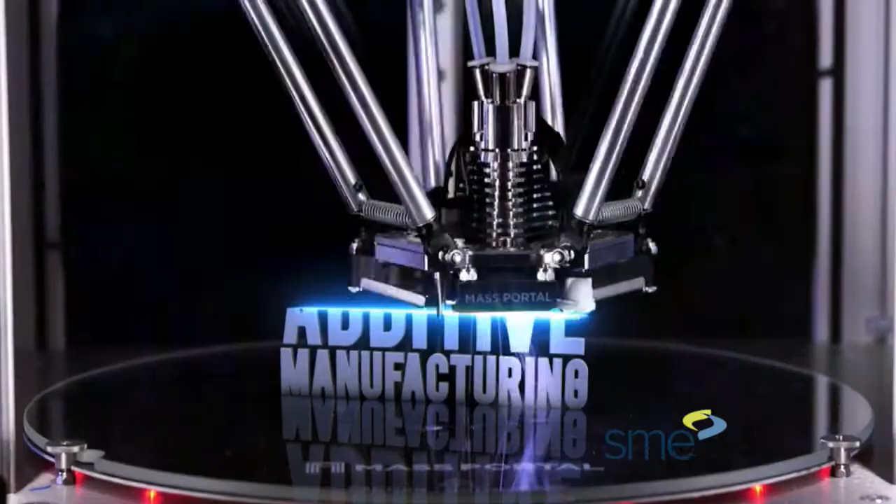Additive manufacturing, the idea that changed an industry, building things layer by layer, bringing innovations to the world never dreamed possible. Building designs, building parts, building an industry. We give you strength in numbers.

Together with partners, members, industry, academia, and more, SME is building a home and a community of over 200,000 professionals. People like you who are advancing 3D technologies and creating incredible innovations. You have questions, we have answers.

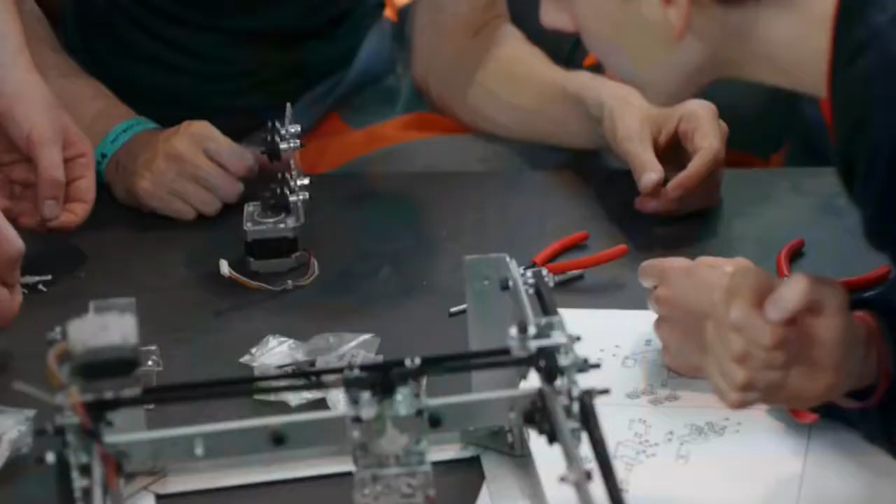No matter where you are on your journey in additive manufacturing, exploring possibilities, designing new innovations, or facing the challenges of scaling up production, SME is your resource every step of the way. SME is fully committed to the advancement and increased adoption of additive manufacturing technology.

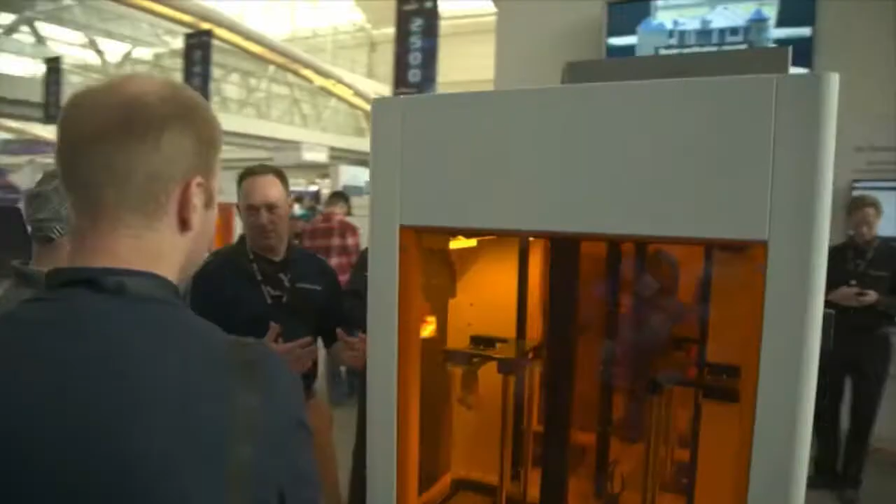That's why we bring the industry together, making connections face-to-face at North America's leading additive manufacturing event series, RAPID plus TCT. Together, we build relationships. SME's Additive Manufacturing Community provides you with unlimited access to industry experts, connecting you to world-class knowledge that's advancing the manufacturing industry.

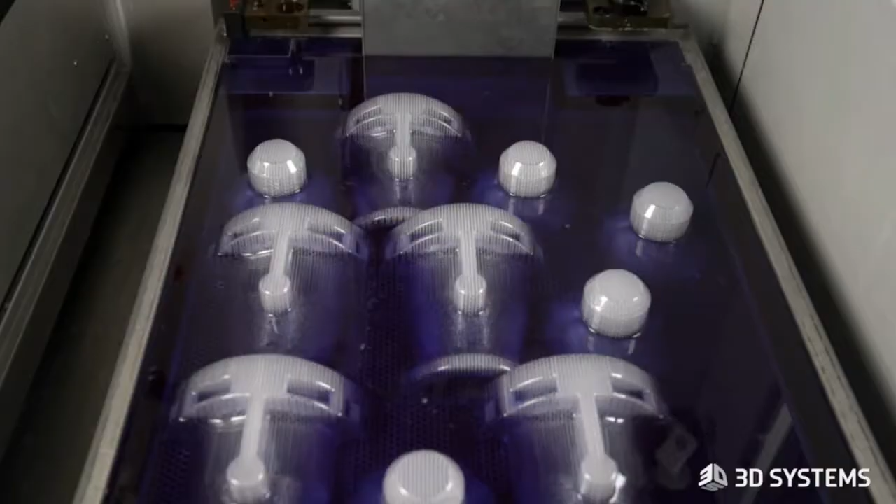Technical groups working together to create content and programs, accelerate industry standards, and solve challenges. We build knowledge. SME is your 3D technology resource. Technical papers, conference presentations, industry news, videos, and webinars keep you on the leading edge of development and prepare you for what's next in the amazing world of additive manufacturing.

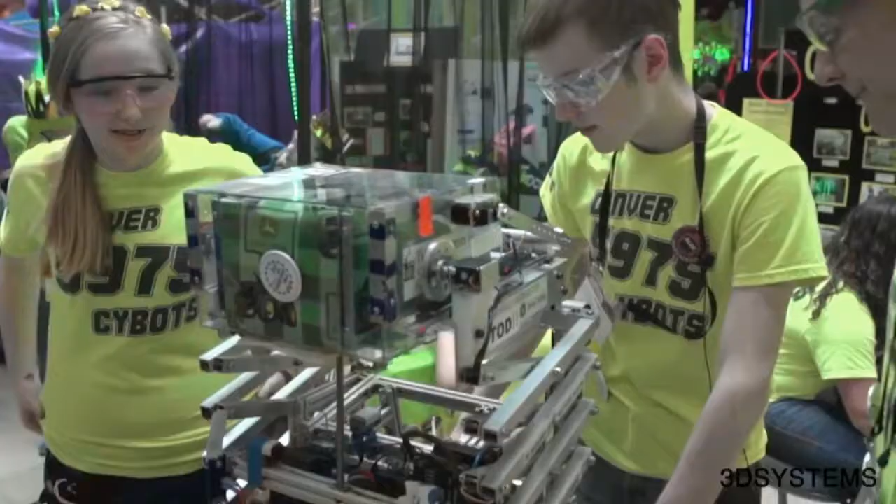Together, we build the future. Attracting students to exciting careers in manufacturing through contests, competitions, and dynamic hands-on experiences. We build reputations with certifications, establishing the gold standard for knowledge and preparing you for unlimited success. SME leads by partnering with the R&D community, universities, national labs, and America Makes to drive technology development.

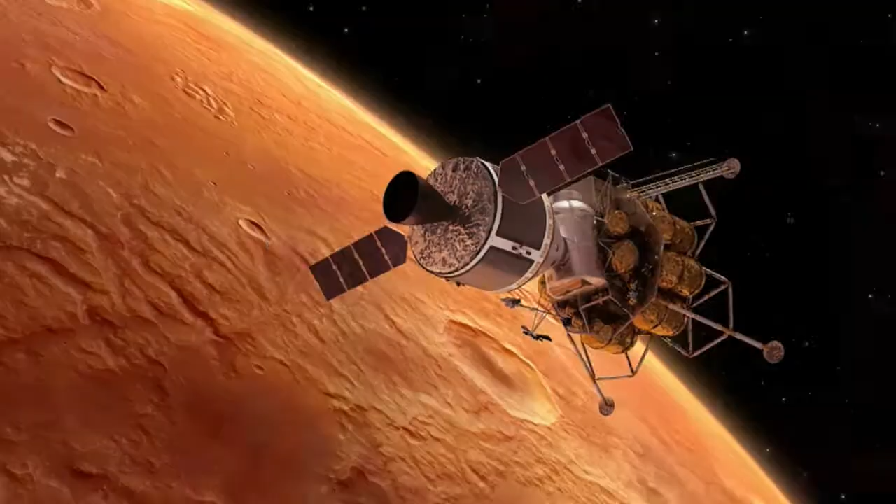Together, we're building a skilled manufacturing workforce, connecting skills with jobs, while integrating new technologies and creating products that couldn't be created before. We've come a long way, and so much more is possible. Together, we'll forge new frontiers for the unlimited, powerful future of additive manufacturing for generations to come. SME is building the ultimate powerhouse community in additive manufacturing. We're better together. Welcome to SME. Welcome home.

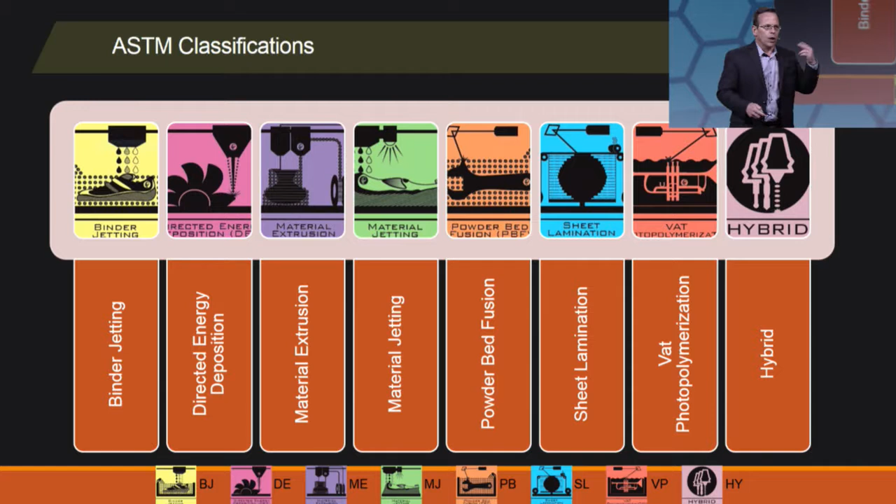So be careful what you ask for. I hope you're ready for what's new, because you're going to have to hang on to your hats, because this is going to be a very fast-paced ride through what's new. We're going to hit 100 miles an hour right now.

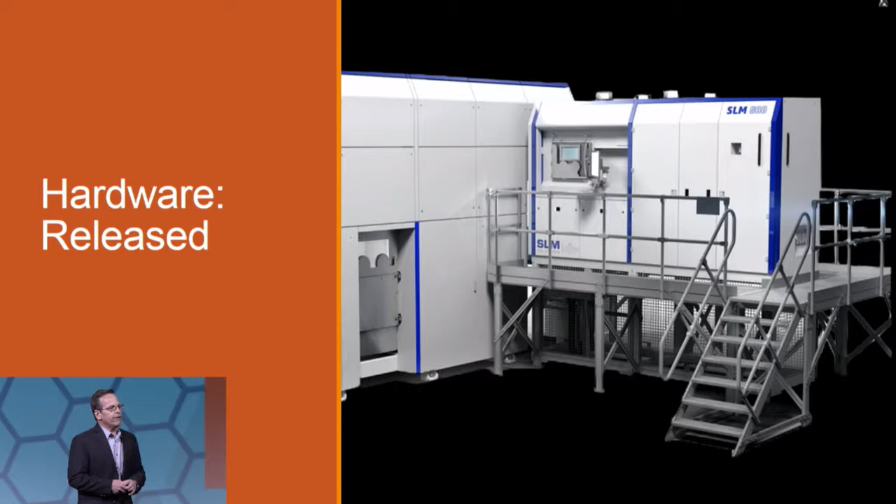We're going to start with hardware in the 3D printing or additive manufacturing space that has been released, meaning you can buy it today or very shortly, a matter of weeks or a month or so, and have it available in your shop. We're going to start with metals.

XJet out of Israel installed their first two machines. The platforms are called Carmel 700 and Carmel 1400. The process is called nanoparticle jetting - they're jetting nanoparticles of metal or nanoparticles of ceramic. That creates a green part, which then goes into a furnace for full sintering. The Carmel 1400 has a 1400 square centimeter working area.

The 700 is a little smaller, with 700 square centimeters. Now, one thing to note here, XJet has announced this technology, talked about it here at RAPID over the last 3 years. So sometimes you have to exercise patience for new technologies that are coming out, or maybe not. Meld Manufacturing surprised me, popped out of nowhere.

They have a machine to show you that they can sell to you today, called the B8, with a brand new process for additive manufacturing of metal parts based on friction stir welding. What they're looking to do is overcome some of the challenges and limitations we have with respect to residual stress. This process doesn't have that, and it expands the portfolio of materials you can use.

So using friction stir welding also allows them to use a variety of inputs. They can take powder, they can take recycled chips from your CNC operations, they can take bar stock or tube stock, put it in the machine to create a metal part. They call it solid state because it never hits a melt point, and that's what reduces the residual stress. So we expand our material portfolio and also pick up some speed. They claim about 10 times faster than competitive technologies.

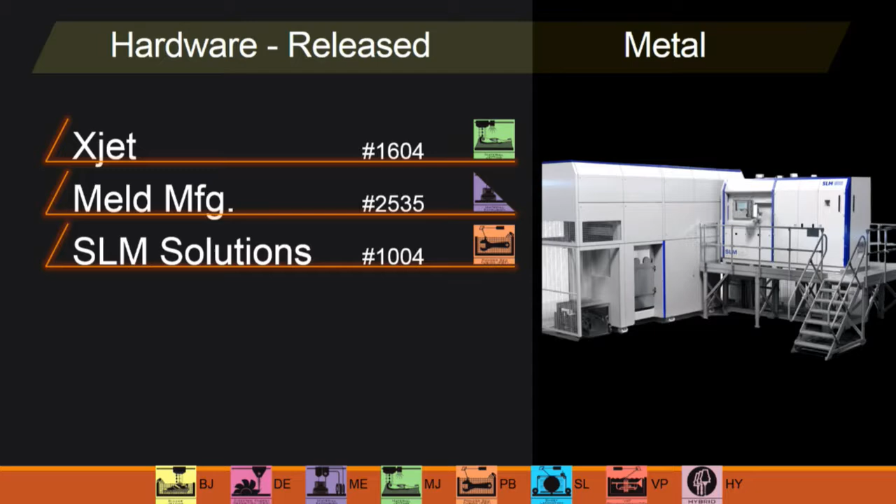SLM Solutions, a tried and true player in the metal space, announced the SLM 800 at Formnext in November. This is a large format metal additive manufacturing machine based on the powder bed fusion process. It's tricked out with 4 lasers, 700 watts each, and built for scalability and integration into an automated workflow. The machine itself is only the right half of the image behind me. All the pre-processing and post-processing equipment and processes are housed in the equipment to the left-hand side, to handle unpacking, depowdering, powder handling—all the things that have lots of touch points and labor demands that drive us crazy and prevent us from moving truly into production.

Renishaw, also another tried and true player, is going a little different direction, staying with the size of machine they're known for—a medium-sized frame, roughly in the 10-inch by 10-inch range—with the RenAM 500Q. Q stands for quad. The RenAM 500 has already existed; they've added 4 lasers, 500 watts, to make the Q. This is all about lowering part cost through efficiency in the operation. It also has the ability to bolt on pre-processing and post-processing automation units to reduce touch labor.

Spee3D, a new player, is going after speed. How does 100 times faster or 1,000 times faster sound to you? How are they doing that? They're borrowing from the cold spray industry, a well-established technology where you're firing metal powder at supersonic speeds. When it makes impact, you form a mechanical bond. So they too are eliminating the issue of residual stresses, which drive us crazy in many of our technologies.

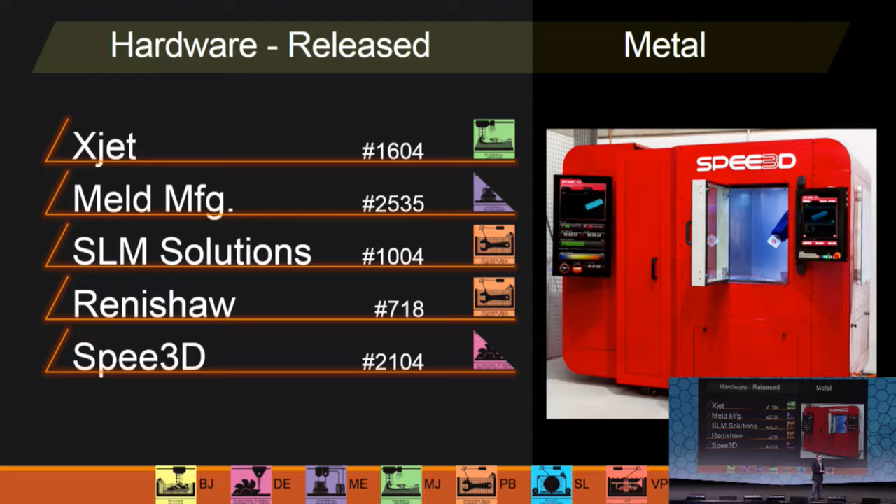They're also expanding the material platform or portfolio, like Meld Manufacturing has done, to the extent that they'll be demonstrating in their booth at 11 o'clock and 3 o'clock tomorrow this machine called Lightspeed, or Lightspeed 3D—I'm not sure which name they go with—producing copper parts. And by the way, the National Research Council of Canada is also using this technology, playing with magnetic materials to try to 3D print magnets.

Sticking with metals, Formalloy. Previously they had the L series; now they've got the X series, which is just being introduced and debuting here at RAPID. This is directed energy deposition technology. The difference on the X series is that they're adding blue laser technology. IR, infrared, is very standard in our industry—they're adding blue laser.

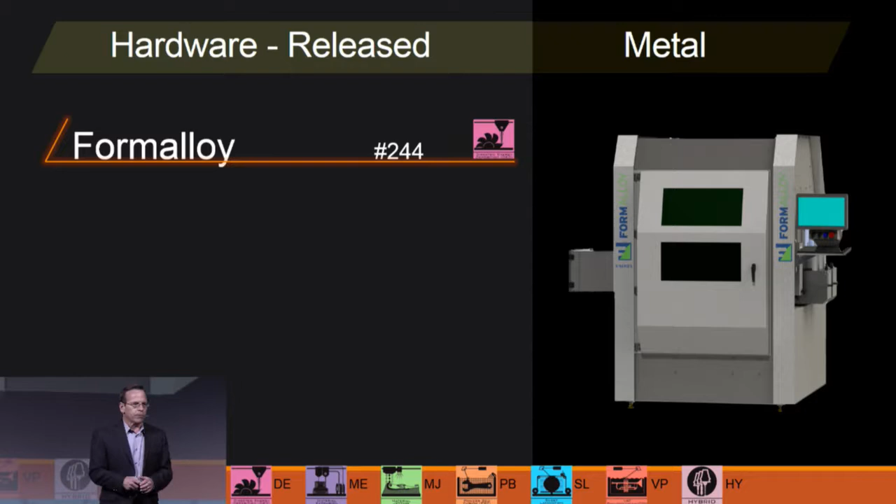Why? Blue is absorbed faster, or more readily, so that increases the throughput. They're saying 2 to 10 times faster. It also expands the material portfolio available to you, so you're getting speed and expanded material offerings.

Digital Metal—this is a business unit or subsidiary of Hoganas, which is a global supplier of metal powder for traditional applications like press and sinter, and metal injection molding. For about 6, 7, or 8 years it's been offering additive technology as a service. Just late last year they introduced the DM2500 as a piece of equipment you can purchase to build your own metal additive manufacturing parts. It's based on binder jetting technology.

So they're going to jet a binding agent onto the metal powder. That creates a green part, which is then taken through a debind process and then into a furnace for full sintering, yielding a fully dense part—the same exact methodology and process used in the press and sinter and metal injection molding marketplace.

They are going after smaller parts, higher precision, finer surface finish. Think in terms of jewelry and watch cases, that sort of thing.

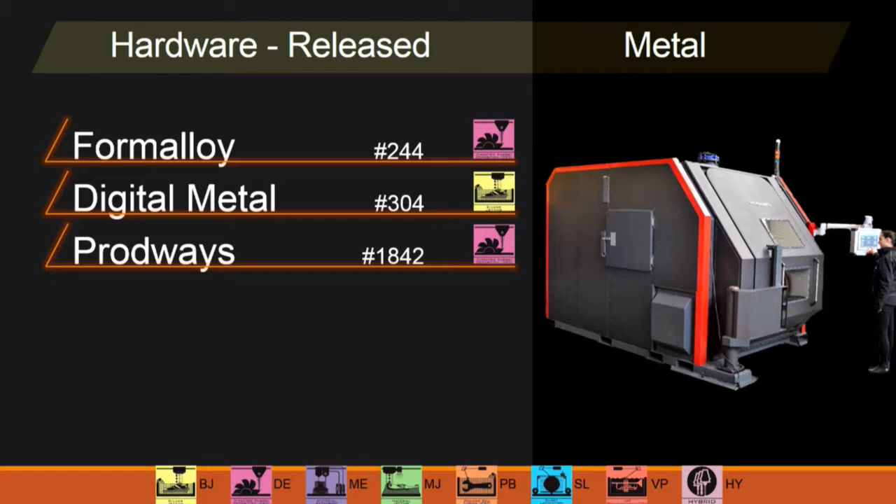Prodways. I don't know if I like this name. They're calling it Rapid Additive Forging, and I don't see any forging in this. It's actually based on electric arc. So a deposition head mounted to a robot in an inert environment, laying down metal material in the inert environment allows them to go after the reactive materials, such as titanium, which happens to be their first partner, their first installations.

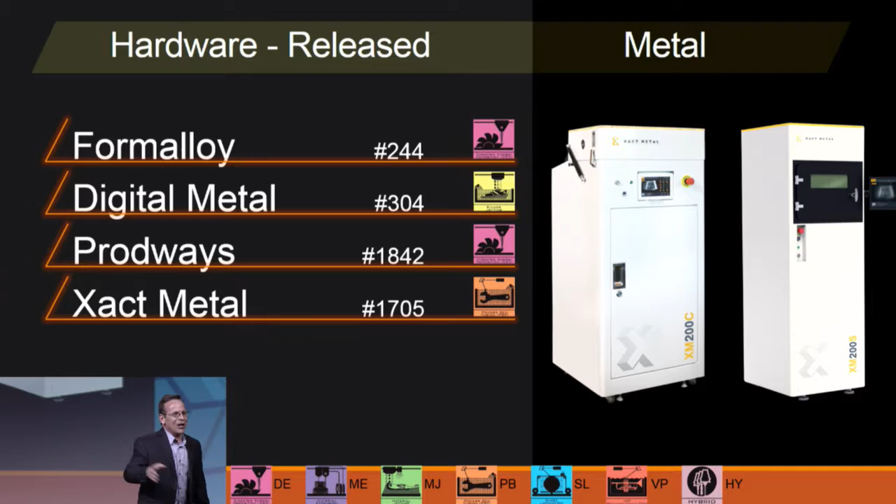In the non-metals, we have EOS, who introduced 2 machines. The P810, now this is a high temperature platform. They've had the P800 out for quite some time. The P810 is the successor to the P800. It is a larger format, plastic powder bed fusion system.

And interestingly, in the press release, which was embargoed until this morning, so this is news that's just breaking, it was designed around the specific intent to process a material that they call ALM HT23, which is a carbon-loaded PEKK material. It also has all the automation components around it to fit into a production environment.

They also announced recently the EOS P500, which is the successor to the P396, which is reducing part costs by about 20 to 30% while increasing throughput by 2 times.

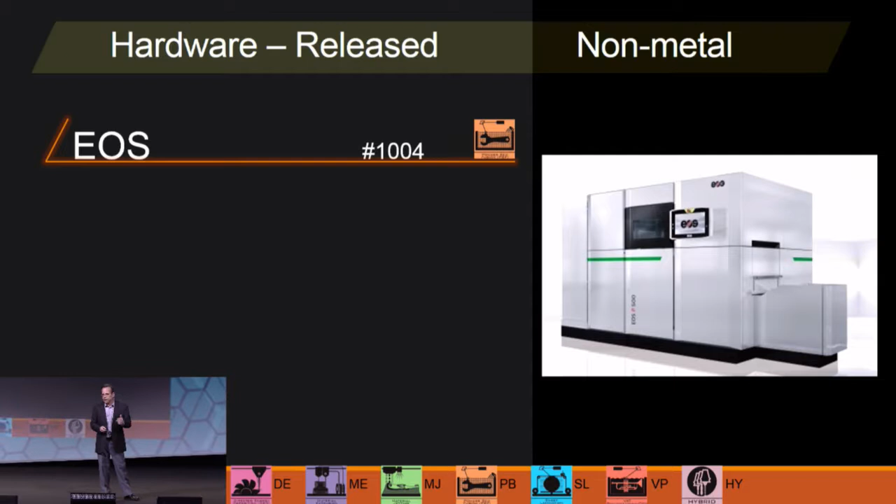HP has 2 announcements. Most recently, the Jet Fusion 300, 500 series. There are 4 machines in this series, 2 for the 300, 2 for the 500. They vary by the number of agents that you can print and also by the size of the envelope. It's a mid-range system for size.

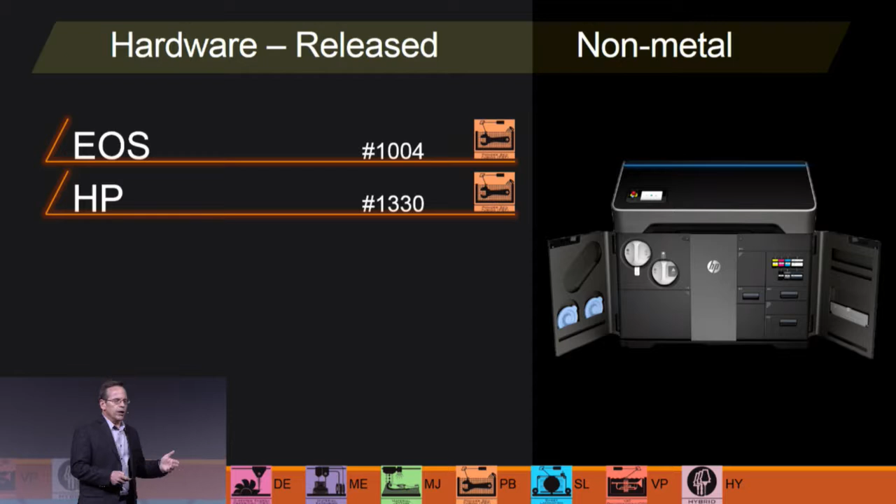Why would we need 8 agents? Well, this is HP's delivery on the promise that we're going to have multi-jet fusion with full color parts. So a detailing agent, a fusing agent, and 6 agents to impart color. The price point for these is very attractive, starts at $50,000 to get you into the jet fusion or multi-jet fusion processes.

Then we have Farsoon, going after large plastic powder bed fusion systems, the FS1000P. FS for Farsoon, P for plastic. 1000 stands for the length in the x-axis of the build chamber, so 1,000 millimeters. It is also a reasonably high-temp machine at 220 degrees C, and it's the first time they've introduced or tied into their machine their concept that they call CAMS, Continuous Additive Manufacturing Solution, which again is a modular, scalable solution to bolt on the processes on the back end and front end.

In their statement, it's all about driving the uptime, or the production time, of the machine, so you never have to sit and wait for something else to happen before you build your next part.

Here's something new, born out of the Technical University of Vienna. They're calling the process hot lithography. The premise is that the photopolymers we have available today are limited in mechanical or thermal properties because we have to use less viscous materials to get them to flow to where we want them to go. So what happens to a material when you add a little bit of heat? It becomes less viscous. So they're doing a hot lithography process so you can use more viscous resins in the 3D printing process, and what they believe that'll do is open the door to material properties not previously available to us in vat photopolymerization.

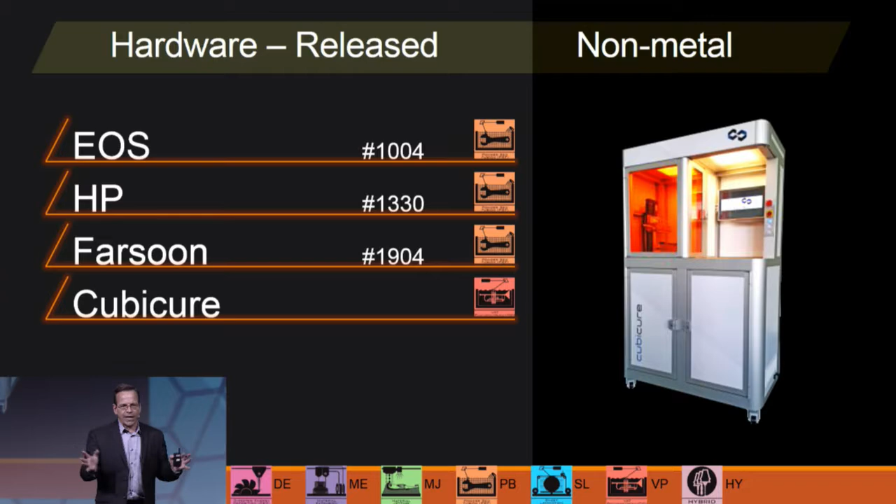They also state that the hot lithography process makes the material more stable and also more reactive. Being more reactive means you're going to have faster curing, faster build times. Take a look inside the machine — it's cartridge-based, and they're developing their own materials. Plug the cartridge in, heat it up, and build your part.

The last one on this slide is UnionTech. This is a Chinese company that came to the North American market in the last 2 years and has really built a reputation for quality equipment, dependable equipment, and really nice output on their parts at a lower price point. With their latest machine, the RS Pro 1400, they're also going after very, very large stereolithography — 1400 for 1400 millimeters. They had to actually build a carbon fiber recoater blade to extend over the 1400 millimeters because they found that metal was deforming in the middle due to the expanse.

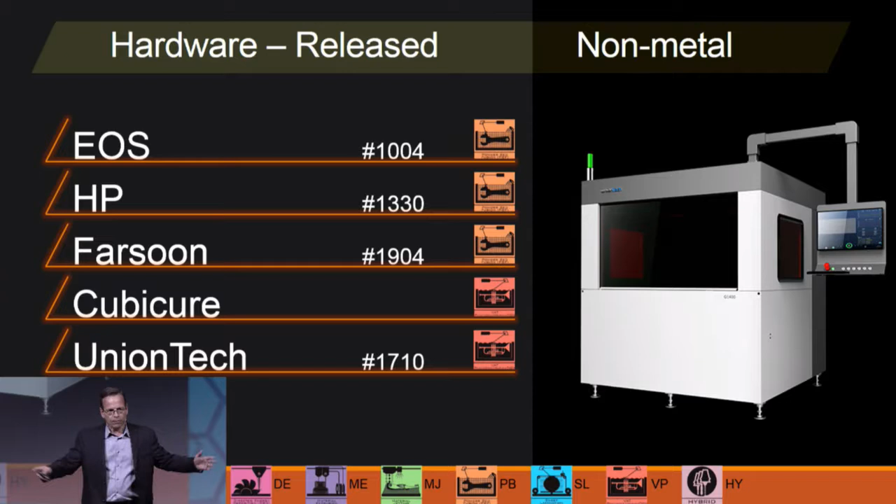The next ones on this slide are the material extrusion class. This one was embargoed until today. Ultimaker, who's been in the space for a number of years, is coming out with the S5. The S5 runs about a 14 by 11 inch build area, so it's pretty good size. But what caught my attention is that it's built for the industrial user, and they make the statement that it integrates hardware, software, and material properties.

What the heck does that mean? Well, it means it's not up to you as a user to work with the hardware, figure out the material properties that will actually work to build your part, and tie that all together with third-party software. They're building an entire package, a solution that aids in predictability and routine performance, where you don't have the doubt that something will or won't build. They're also adding lots of industrial-grade hardware inside the equipment for reliability and uptime.

Another company tackling the industrial market for material extrusion is Fusion3. They're here in booth number 1704. Their machine is called the F410 — really reasonable price point, $4,500 — running in the 14 by 14 inch build area. It does have an enclosed chamber. It's not going to maintain high temperatures, but it will maintain temperatures up to 45 degrees C, which helps with managing stresses that can cause deformation in your material extrusion parts.

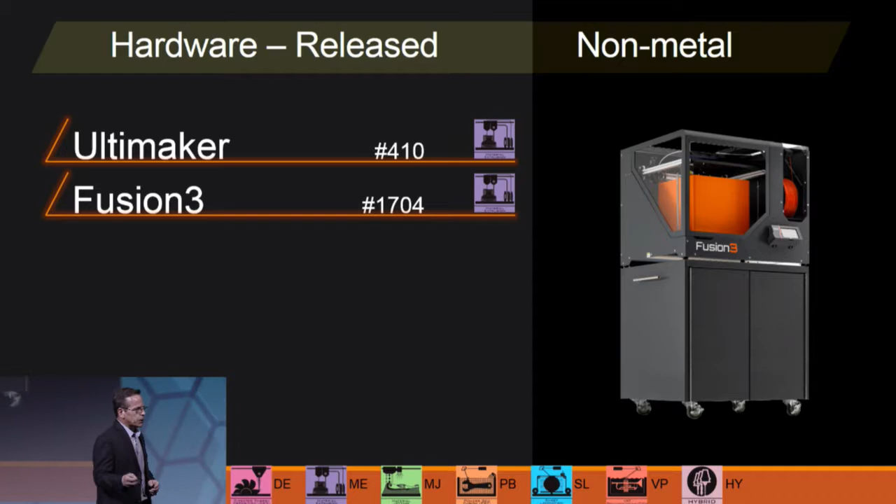Titan Robotics — I believe this is what Titan Robotics printed. They've announced that they're turning to industrial motion controls from a world-renowned leader to give you faster operation with precise control of the deposition head, so you get speed and accuracy. You also get a feedback loop for predicting and preventing material jams. Their line of equipment is called Atlas, and these are not small desktop machines. Atlas runs upwards of 4 foot by 4 foot by 4 foot build area, and you have the option of an open chamber exposed to ambient temperature or an enclosed, thermally controlled chamber.

Essentium, actually Essentium Materials, has come out with a machine called the HSE, high speed extrusion. They're picking up most of their speed not by a bigger orifice and dumping more material through, but by faster tracking of the deposition head across the XY area. This one's interesting because they have patented technology that was previously a bolt-on for other people's equipment. It's called Flash Fuse. They're using a material coated with nanoparticles, and as you can see in the little purple area, they use plasma to send an electrical charge which activates that coating, creating localized heating and increasing the Z-bond strength. They're also claiming about 10 times performance increase compared to other material extrusion systems.

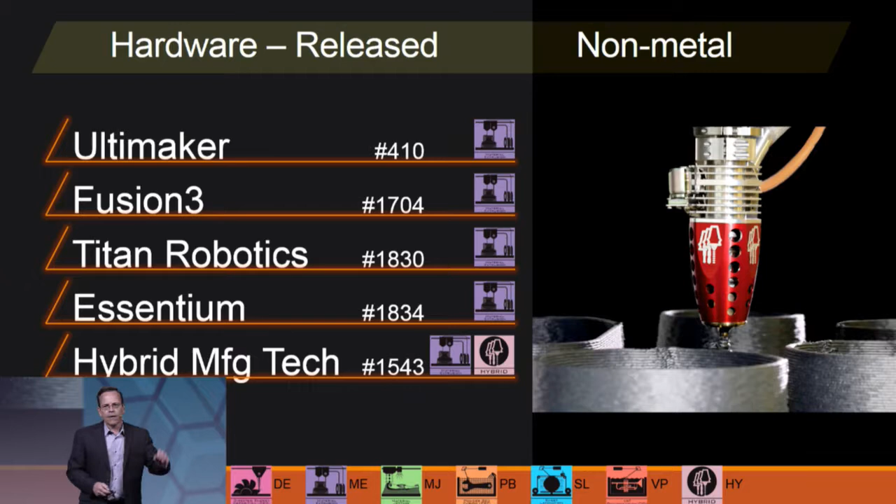Previously, it's focused on the directed energy deposition technologies or laser metal deposition. Now it's into polymer extrusion. This is pellet fed and pumping out upwards of 20 pounds of material an hour. So we're going to kick over into what's been announced but not available. So we're getting a little peek into the future.

3D Currax, they're not here at the show. However, they were kind enough to allow RAPID to be the first event here in this presentation to publicly expose what's going on. They've actually launched their website timed with this presentation, so you can go to 3dcurrax.com and see what they're all about. These guys are attacking production. They want to disrupt the injection molding marketplace. They're using LCD panels, backlit, so imagine DLP, but using LCD. The reason for that, LCD panels come in larger formats, gives you scalability.

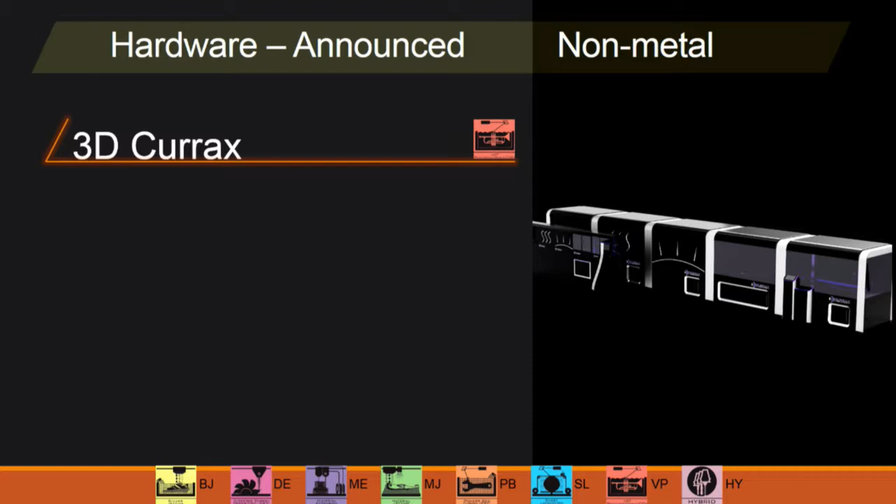Two machines available, the MRK3 and the MRK10. The 3 has an XY working area of a little over 400 square inches. I'm guessing that's going to translate to about 25 inches by 15 inches for XY. The Mark 10 is 10 times bigger, so 4,000 square inches of working space, which is going to get you into probably roughly the 70 to 80 inch range for at least one of the axes.

Now, to attack the injection molding market head on, they're looking at speed. If you go with the Mark 10, build an impeller about 2.5 inches in diameter, 1 inch high, that's a 30-minute build. But you can fit 722 of those impellers in the Mark 10, which breaks down to a throughput time on this machine of 2.5 seconds each, which is very, very competitive, actually best the injection molding marketplace.

However, they're not sticking with just a machine. As you can see here, they're thinking in broad terms and automating the entire process, adding robotics, adding artificial intelligence to optimize the build to get the most out of it, taking you all the way through to cleaning and curing and post-support removal in an automated fashion.

Next up, Evolve Additive Solutions. This is a spin-off or spin-out of Stratasys. The news came out, I believe, about a month or two ago. The process is called STEP, and I'm going to walk you through that terminology so you understand what's going on. STEP stands for selective. We can scratch that. That's an unneeded word. The next word is thermoplastic. So this is not the metal solution that Stratasys has hinted at. Instead, it's thermoplastics. It's able to process both amorphous and semi-crystalline materials.

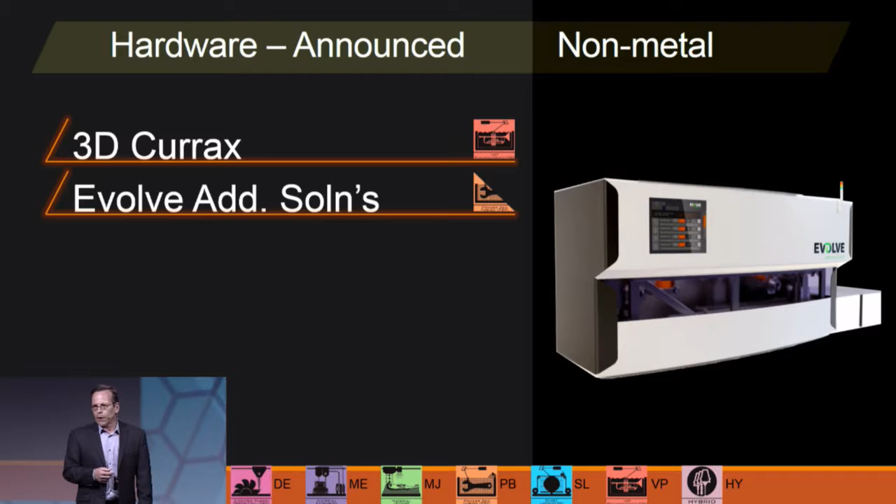Now they are claiming, and I believe this to be true, I saw this back in May of last year, early prototype machine, they're claiming speeds 50 times faster than the fastest powder bed fusion technologies on the market today. They're claiming near isotropic properties, they're claiming surface finish that rivals injection molding, and they too, like 3D Currax, are going right at the heart of the production technologies that we know today.

Another new one, MVP, Magnum Venus Products in collaboration with Oak Ridge National Labs. Large format, 16 foot by 8 foot gantry-based system to produce additive manufacturing parts in thermoset materials. That's the first time you've heard that combination of large and thermoset. The company is a supplier of equipment for the composite part-making industry, so their target right now is to use the benefits of thermoset, meaning that they're not going to melt in an oven or an autoclave, to make the molds to make the composite parts. Aerosint.

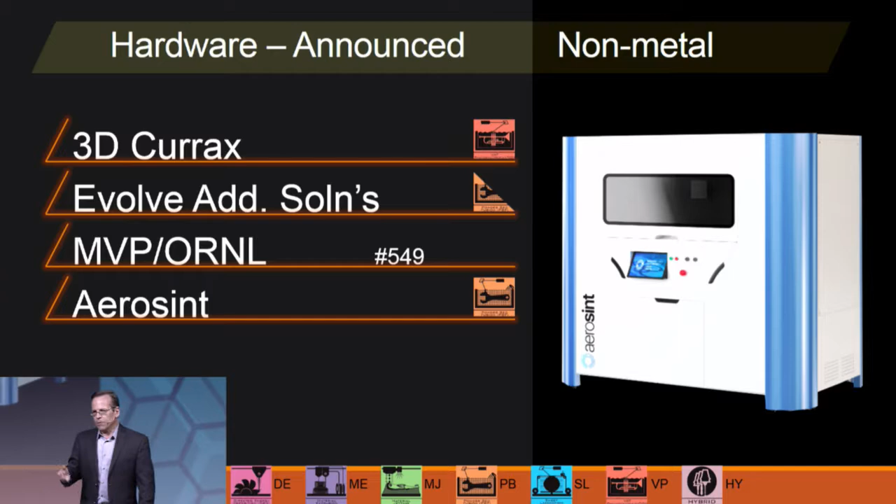But short-term, they're going to go after plastics, and they're going to take on one of the issues that we have in powder bed fusion, which is recycling rates. All that excess material in the machine that is just supporting or holding in place the part is exposed to temperature, which causes thermal degradation, which means that you can't use it over and over again. Well, the second material they're going to deposit is a non-fusing material, which means that you can recycle it unlimited, so you're not losing money by material that you can never touch.

Next one up, this one is announced. It's really available right now, but since the company doesn't sell direct to you, the end user, but sells to OEMs of equipment, that's why I'm saying it's announced. So Strangpresse is exclusively licensed Oak Ridge National Labs technology for multi-diameter orifice extrusion heads. What that means is on the fly, you can go from small diameter for high precision, fine detail, and then open it up on the same build on the fly with a larger diameter to backfill to give you quality, precision, and also speed.

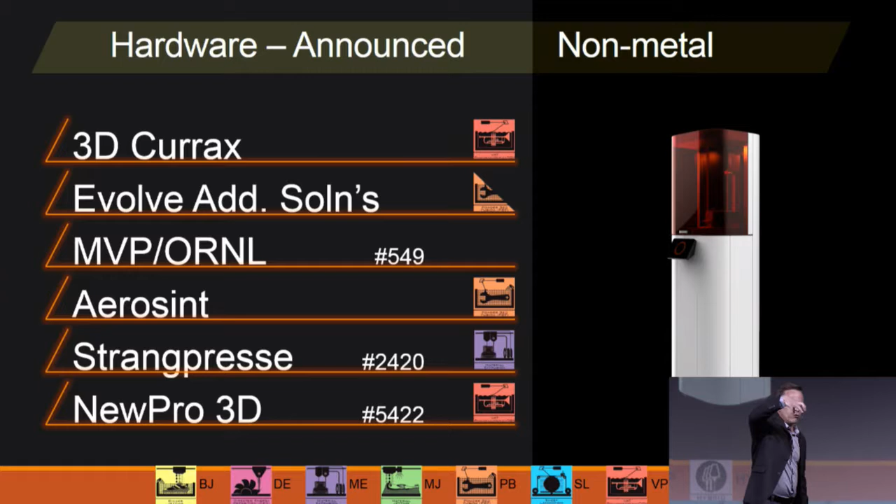And finally, NewPro 3D. Just saw them in the back here, shook their hands. This is a continuous DLP process, so think in terms of what Carbon is doing, think in terms of what 3D Systems is doing. It's another alternative for the continuously draw your part up out of a vat of photopolymer. Their machine is called the MP1. They've introduced the technology over the last couple of years, but come October of this year, you'll be able to take delivery of the MP1 system. That's why I put them in the announced category.

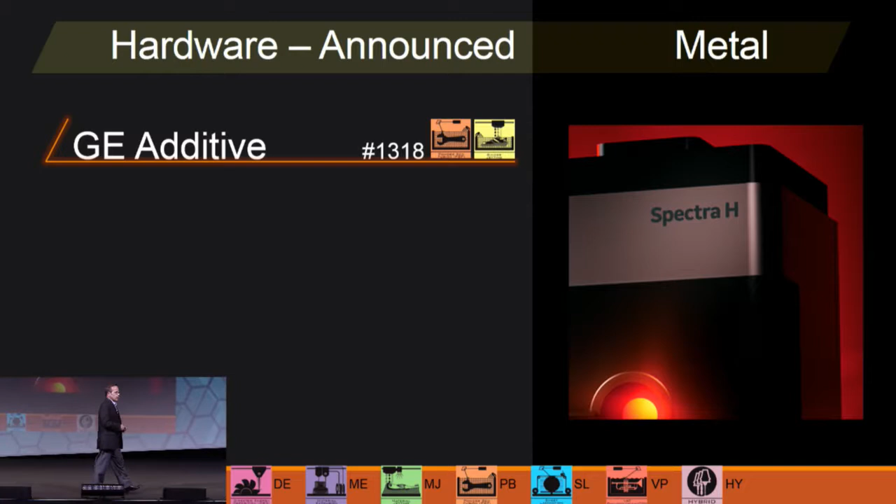Hardware announced in the metal category. First up, GE Additive with 3 things. Tomorrow at 11 o'clock, they will unveil the Spectra H. This is electron beam melting, EBM. This is a larger format machine, higher temperature machine, and also one that will process titanium aluminide, which has been done, but on a case-by-case basis for those kind of people that want to experiment and make a technology do something that it shouldn't. Now you'll have TiAl available as a commercial solution.

I don't know if the launch tomorrow is going to mean that you can buy a machine tomorrow and take delivery, or if it's just being announced. You'll have to stop by their booth at 11 o'clock to understand what the position of that technology is.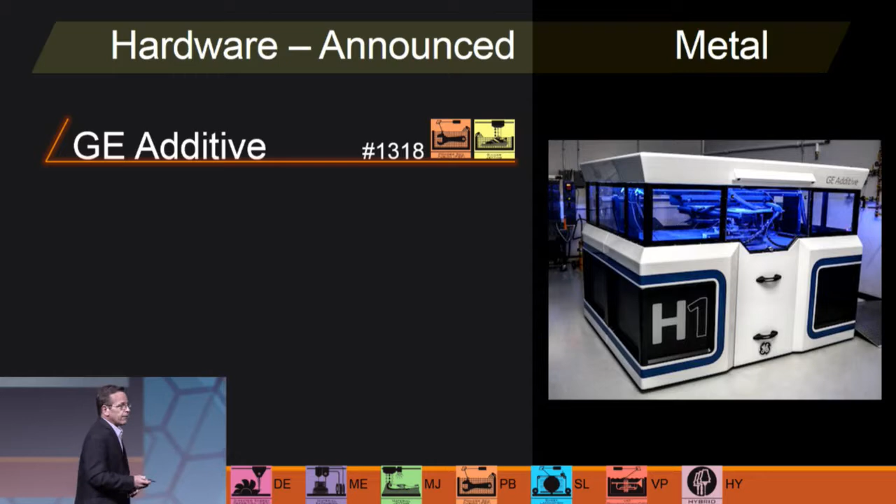And then finally, they announced their first platform based on Project Atlas. Additive Technologies Large Area Solutions, that's what Atlas stands for. And this is what they're calling a meter class metal additive manufacturing machine. Meter class meaning 1 meter by 1 meter and up to 1 meter depth. Not a lot of details other than it's a gantry-based system. So instead of using galvos and mirrors, we're directing it from a gantry.

And they have to, because it's so big, to prevent you from having all that inventory of material, they're actually using discrete dosing in the machine. How that works, what it means to us, I have absolutely no clue because they were very, very secretive on their unveil at Formnext. You'll have to ask them and try to dig out details.

AIM 3D is an alternative for extrusion to create metal parts. They've got a machine called the ExAM 255. What's interesting with this is it's combining thermoplastic with metal powder, which is then fired in an oven. What's interesting for them is they're using pellet fed and somehow mixing the metal powder to get higher speeds, higher

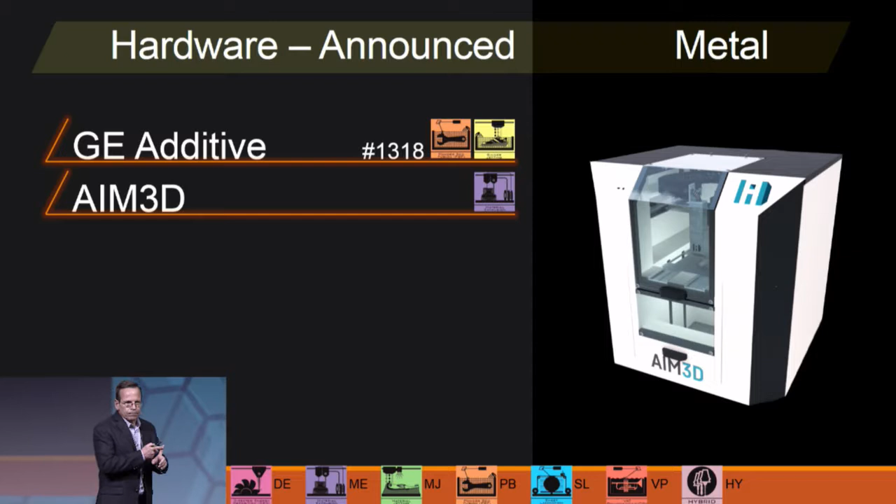throughput for metal parts. A company called Colido is also doing the extrusion of metal-infused thermoplastics with their machine. Their process is called AMSS for Additive Manufacturing Selective Sintering.

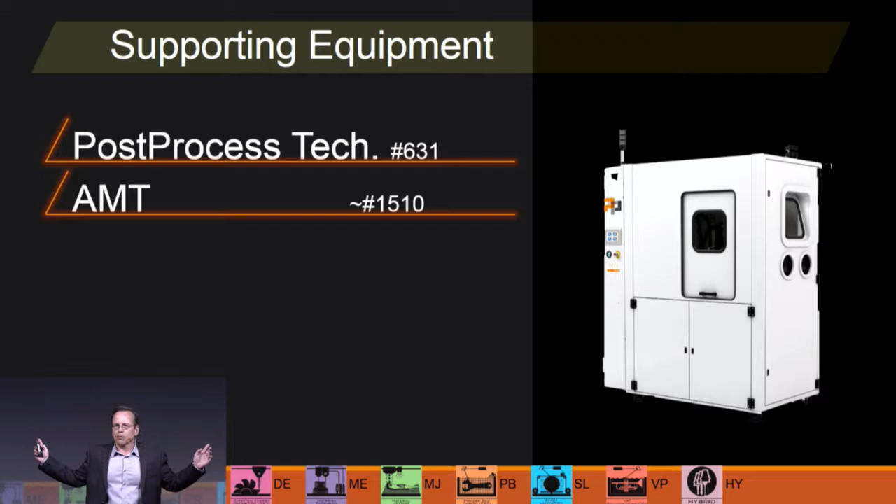We also are seeing progress in supporting equipment, and I'm going to pull up all three of them here, which is good news for us on the back end. Automation, automation, automation. I've just got a system shown up here. That's not what's new. That's from Post-Process Technologies. But what is new from Post-Process Technologies?

Something called CONNECT3D. Imagine walking up to a screen and selecting, I want surface finish. Here's the surface finish I want, and then clicking a toggle for if you want support removal or not, and then selecting the file and letting the process rock and roll. Whether it's daisy-chained with multiple pieces of their technology or not, it takes care of it in the background, playing

to the digital thread. AMT, Additive Manufacturing Technology, exclusive licensee of the PUSH technology out of the University of Sheffield. This is a chemical process for processing powder bed fusion parts from processes from EOS, 3D Systems, and HP. No details on how it works, but their claim is injection molding quality parts at the push of a

button. And then finally, I've got to go back on this one, Roessler Benelux has mechanical finishing solutions. They've designed some equipment from the ground up, specifically for automating the post-processing of additive manufacturing parts.

For a little bit of taste, just to see what the future holds, a little bit of excitement, Lawrence Livermore National Labs, process called volumetric 3D printing. So currently, the best we have is projecting one plane of light to cure a single layer at a time or continuously. What Lawrence Livermore is doing is projecting light from the Z-axis, X-axis, and Y-axis simultaneously.

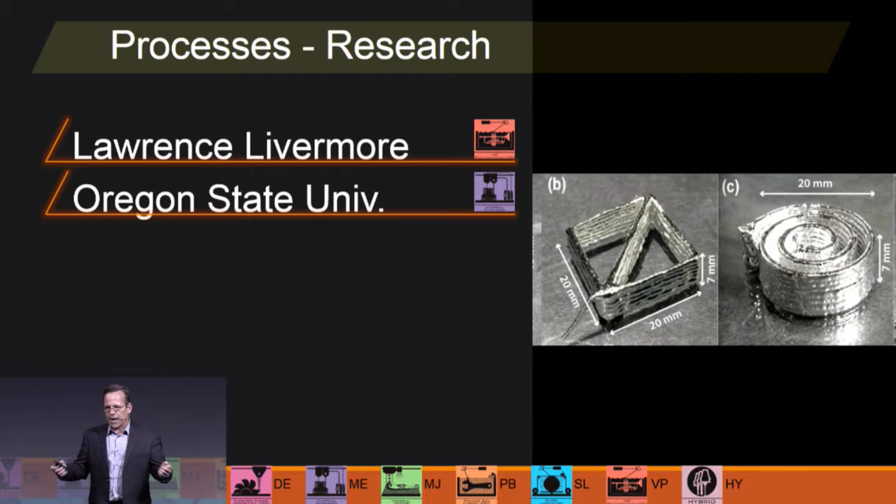Oregon State University with liquid metal printing, taking a metal that's liquid at room temperature, combining that with nanoparticles of nickel to create a material that's extrudable and has some substance. Although I'm showing parts here, they seem to be focusing on flexible electronics because the output actually will flex, bend, and give.

Finally, MIT, they've had lots of new technology for us. Now we've got a fast material extrusion process looking purely at the speed of the head in the extrusion. So instead of just tracking, this bad boy, if you'll watch the video, is just, and that's by lower mass in the head. It's also by higher pressures of the screw that drives the filament and using a laser to impart the energy to reach the semi-molten state.

The other thing that they have up their sleeve, working with Steelcase, is rapid liquid printing, is what they're calling it. Cube of gel, a syringe injected into the gel, thermoset material extrudes out of the syringe into this gel, which supports the whole assembly to rapidly create thermoset parts. A tabletop of about 2.5 feet in diameter by about 2 inches tall, 28 minutes.

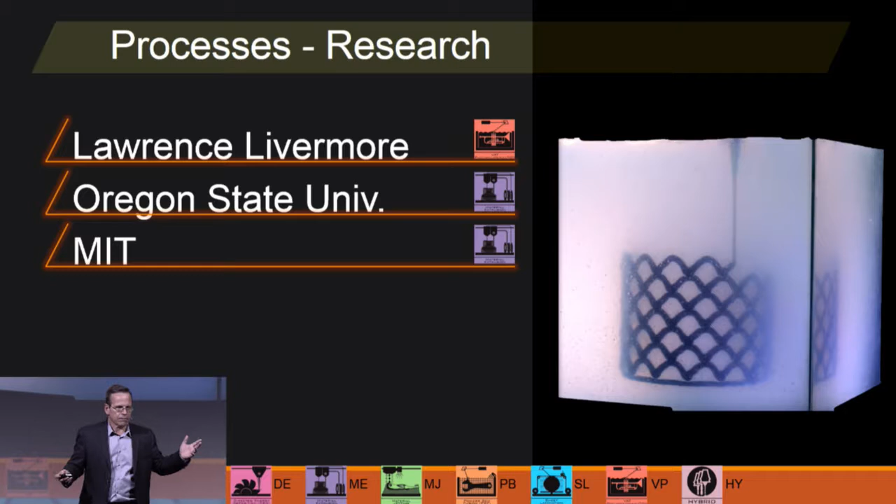But this is all early research. Who knows where it'll go? Wanted to give you a little taste of what the future holds.

Materials, I've already introduced some of the new materials, and I'm not going to get into everything new on the show floor because a lot of it boils down to getting into the details of this tensile strength or this processing speed, which would just drag this presentation out. So you're going to have to discover those yourself, but there are some that are easy to describe that I'll

do very quickly. Stratasys, which has long had Ultem material for its FDM process, has introduced a PEKK material called Antero 800NA. So they brought PEKK to us in extrusion, which others are doing, but now they have it.

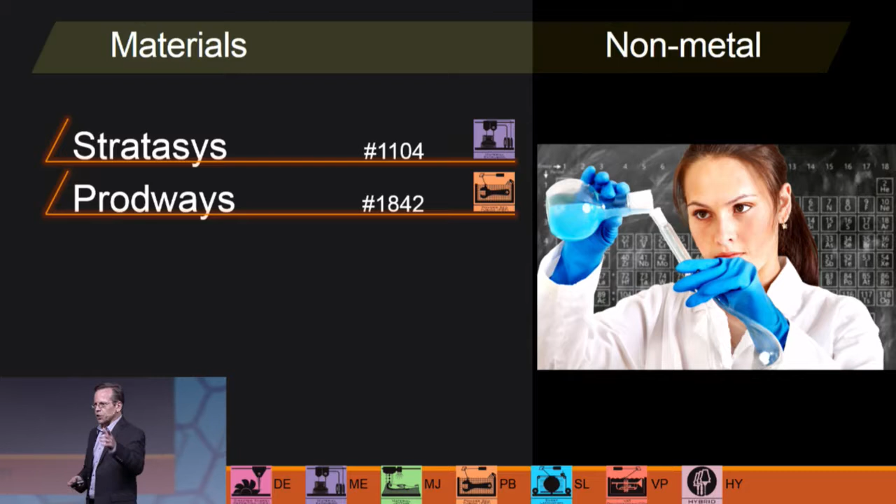Prodways, polyamide 6, 6.6, 612, are some of the commercial grades of nylon that you can use in an industrial context. Prodways is bringing us the first iteration for powder bed fusion of a nylon or polyamide 612, loading it with glass bead.

BASF, 3 different lines, one for powder bed fusion, one for vat photopolymerization, and one for material extrusion. For powder bed fusion, Ultrasint is their brand name. They brought out 2 flavors of PA6, an X085 and X043. Don't know the difference between those, you'll have to investigate.

The photoresin for vat photopolymerization is custom designed for bottom-up vat photopolymerization processes, so we're illuminating with a laser or a DLP light source from the bottom.

And then finally, in the extrusion category is Ultrafuse Z, which is the nanomaterial coated filament that is being used by Essentium, who I reported on earlier.

Also in materials, LPW is working with a partner that happens to produce tantalum. They're looking to bring tantalum powder to the powder bed fusion marketplace, something we've never seen before.

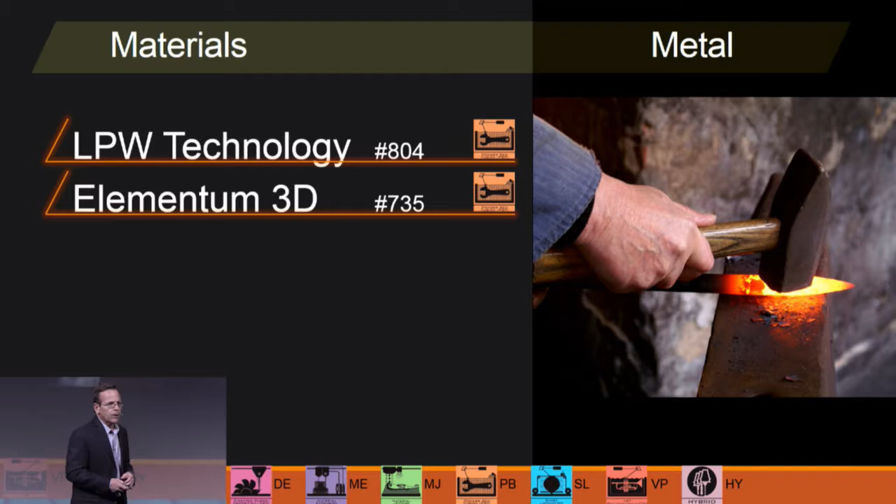Elementum 3D, aluminum for powder bed fusion, but aluminum 6061. It's been talked about, we've seen research, we've seen proof of concept. Now we have commercial product that cracks the code on the issue of columnar grains creating cracking in the aluminum 6061 parts in the powder bed fusion process. So we now have the door open to a new class of aluminum, which is engineering grade instead of casting grade.

And finally, Tethon in materials, Tethon 3D has something called Ferrolite. Ferrolite is a photopolymer loaded with iron particles. Now, I don't know if they're trying to increase the mechanical, electrical, or thermal characteristics of the part by loading it with iron, or if they're planning on using that as a green part, which is then fired in an oven and sintered. If you're interested in iron, you'll have to stop by their booth and see what they're doing and what their plans are for what kind of parts they're going to produce.

Then in software, I'm going to be real quick here. Good news is that we've got a lot going on in software to help each of us as users in the area of design, predictability, control, and analysis.

In design, Fathom came up with an open source program called Crystallon for development of lattice structures for lightweighting. Open source, meaning that everybody can contribute to advance the technology, and open source, I believe, means that it's free. It's based on the Rhino 3D platform.

Desktop Metal. They're here to show their metal additive manufacturing technology, but what's new from them is collaboration with Dassault on a product called Live Parts. Their goal is to simplify and automate the concept of generative design so you don't have to be an expert at that concept. Generative design is where you establish the working envelope that's allowable, plus your mechanical, electrical, or thermal loads, and let the software do its thing and create the part from the ground up.

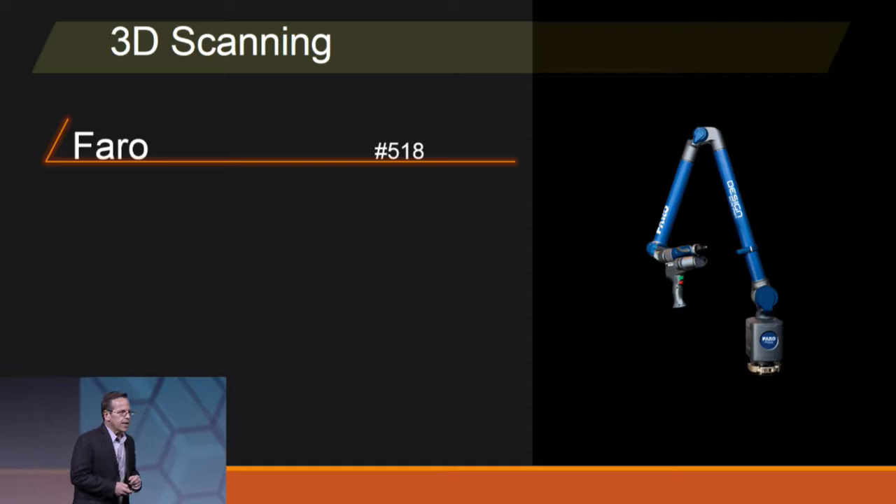Faro has a new ScanArm 2.0. It's lighter, more ergonomic, but also more accurate than the previous ScanArm. Its intent is designed to be used in the design environment. Booth number 518. Shape Grabber, well, and that comes with a blue laser.

So we've gone from red lasers to blue lasers in the 3D scanning world. Shape Grabber has a new head with a green laser. The advantage is it's high speed, 800,000 points per second, but the green laser is better, they claim, for plastic surfaces with a high gloss or reflective surfaces.

Creaform, a company that came in with the HandyScan, a handheld scanner years and years ago, is now going to the other extreme with the Cube R, a turnkey standalone system for the shop floor for inspection. It's a robotic arm with their MetroScan, meant for simplicity and ease of use.

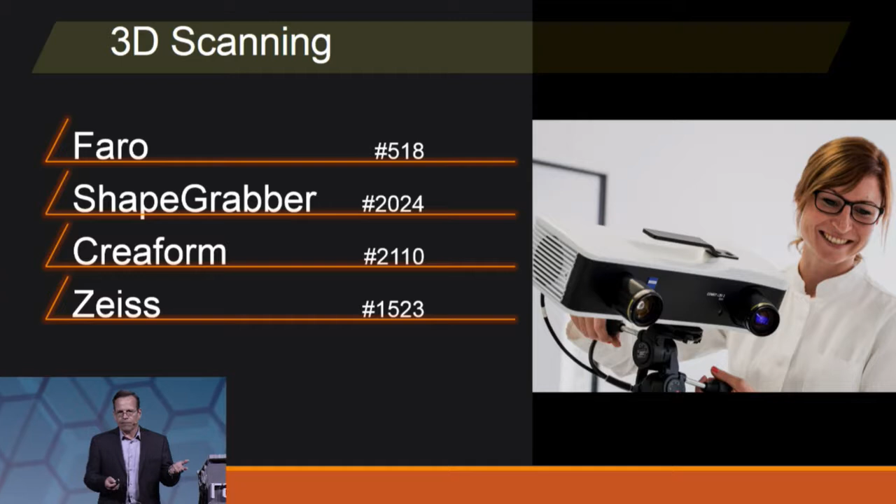Zeiss coming out with their version 2.0 of the L3D scanner, which is a blue light fringe scanner, ultra compact, 5 million to 8 million pixels captured.

Artec, and this will be seen at the Direct Dimensions booth — Artec is not here. The Leo, Artec Leo, is a handheld scanner with onboard processing. So it's untethered, you don't need a computer. You scan with a display and see what you're capturing, and much of the processing is actually going on the handheld scanner.

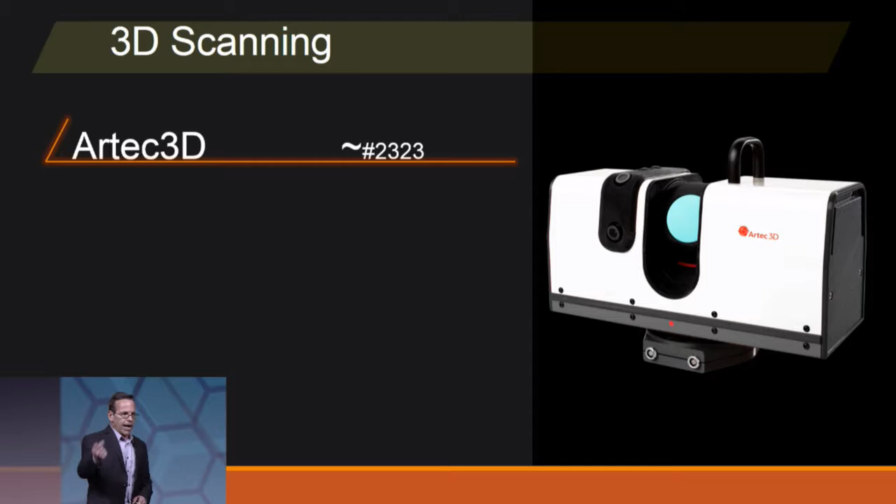And then also the Artec Ray. This is for long range, 110 meters, high resolution, full color as with the Leo, full color, and high accuracy, out to 110 meters.

Verisurf software - the trend here is to tie everything together. What they're looking at is metrology, reverse engineering, and inspection automation. The key concept is universal CMM, meaning 3D scanning software is no longer allocated to just 3D scanning. It's also working with conventional stationary granite bed CMMs to tie the whole process together.

So what's new? Much, much more than I could cover here today. Companies like this have things that you need to see that are new, truly new, and being introduced, but I just don't have the time to cover them.

The last thing I want to mention is that you've made a wise choice to be here at Rapid. There's a lot coming at us, opening new solutions, new opportunities, new applications, but it has the very real danger of just swamping us and inundating us. But you're here at Rapid where you can go see and talk to the players to understand what those solutions can do for you, so that you can ride the wave of innovation instead of being swamped by it.

And the last comment - if you're walking through the show floor and you see a 76-inch tall surfboard, you may want to stop by that booth and ask, how long did it take? Just a little teaser. I'd love to tell you more, but it didn't make my criteria for what's new at Rapid 2018.

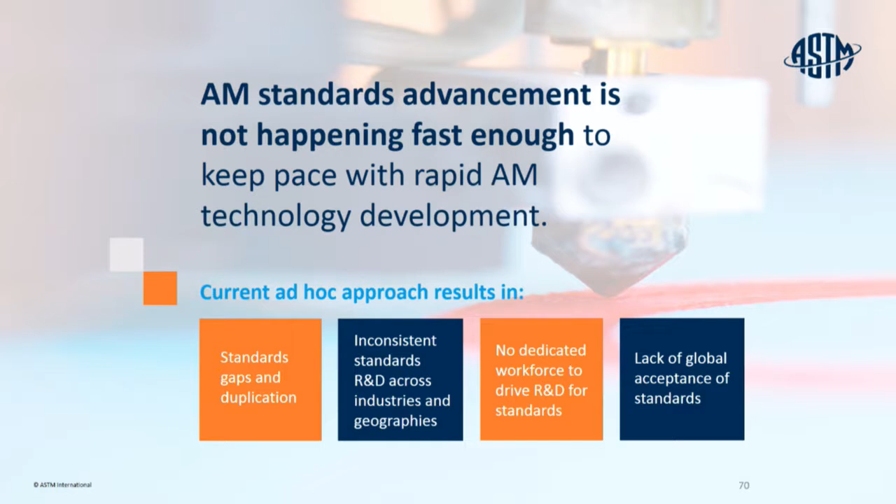The COE that we announced supports our activities in pre-standardization as well as standards development. And here's why: we believe AM standards development and advancements are not happening fast enough to keep up with the rapid pace of AM technology development. In addition, the current ad hoc approach results in standards gaps and duplication, inconsistent standards R&D across industries and geographies, no dedicated workforce to drive R&D for standards development, and finally, lack of global acceptance of standards.

That's why we created the ASTM Additive Manufacturing Center of Excellence - to address this need to bridge standards development with R&D, to better enable efficient development of standards, but also to support education and training, certification, and proficiency testing programs. The COE conducts standards-related R&D to advance technical and data-driven standards across all aspects of AM and AM markets. Fast-track standards development can be accomplished through the COE, ultimately accelerating adoption of cost-efficient additive manufacturing technologies across the industry.

Our selected partners have passed an extreme review process. Based on the recommendation of a diverse review panel, EWI, Auburn University, and NASA have been selected from a large pool of candidates and applicants. To complement this mix, we will announce the winner of another COE partner next month, outside of the US. Here are the roles of each partner in the COE, as you can see. ASTM will continue to serve as a facilitator of standards development and coordinator of R&D.

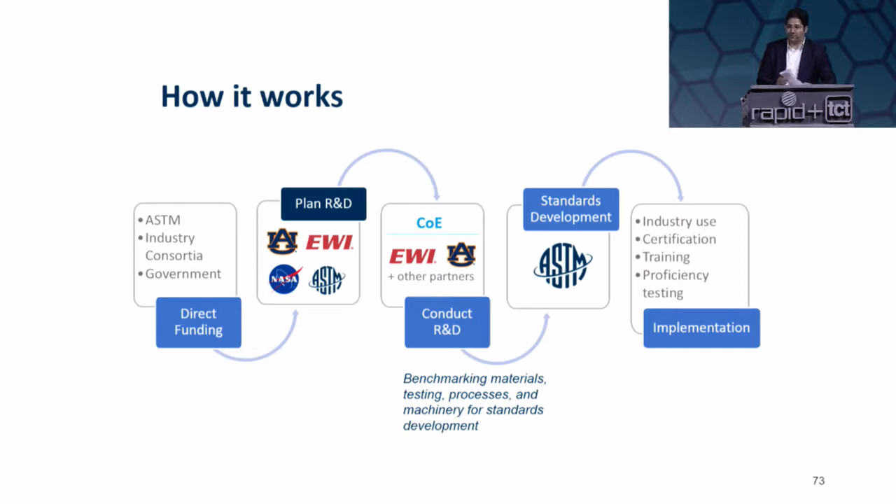Right? There's so many things happening.

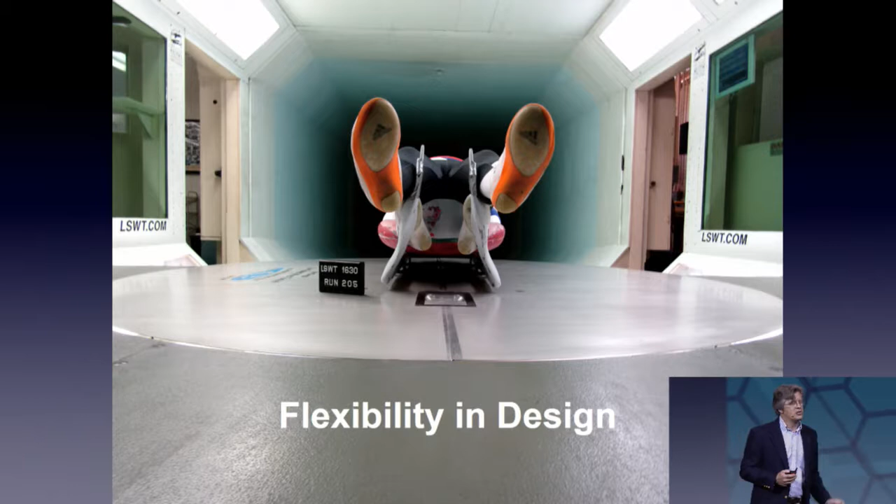So this is the way we used to do it. Now what do we do? Now we go into the wind tunnel, we make the part, and with the technology that's developing so quickly as well in 3D scanning, we scan the sled, the actual sled that's in the wind tunnel that we know worked better, that the athletes are on. We scan it, and what do you get instantly out of a scan? You get a great little CAD model.

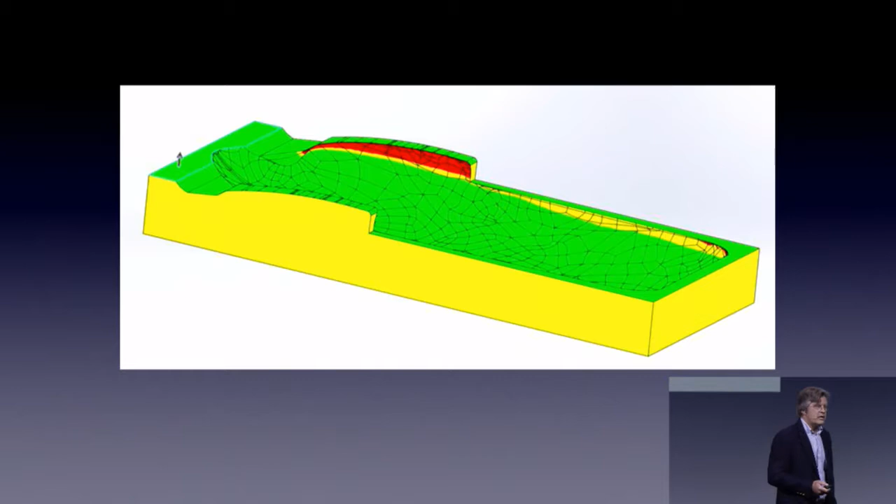So we have the design there. We have the part right there. We clean up the design a little bit, and voila. Within literally a matter of maybe days, if that, we can start printing, and we can print ourselves a mold to build a new sled, and possibly a mannequin as well.

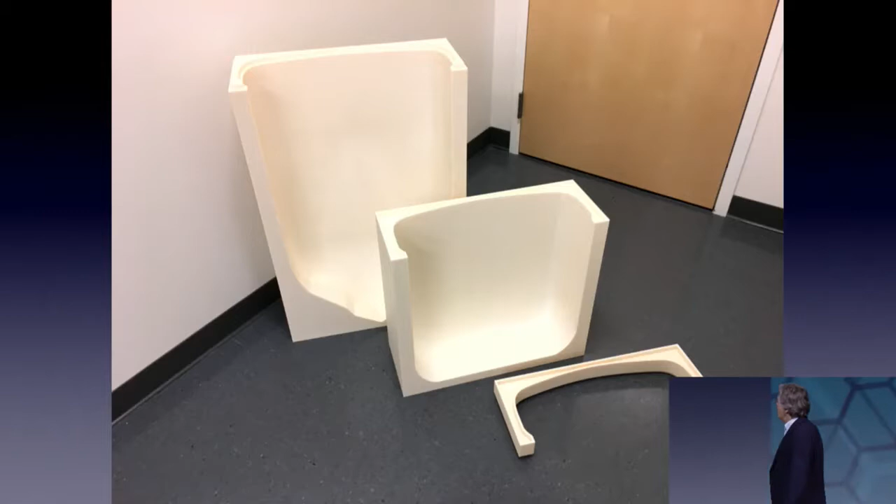And since we're saving so much time, we can make things a little bit newer, where we can make things fit better. Instead of making that one-size-fits-all, this is actually a mold that we made with interchangeable parts, so we can extend the size of it. So if you have a little longer team or a little shorter body, you can mix it and match it and make it work a little bit better that way.

Now, coming back to that front piece, the front piece is very interesting because there's so many parts to it. The way we ended up changing that, I actually ran across the guys from Stratasys a couple years ago at the IMTS show up in Chicago. If you've never been to it, it's a wonderful manufacturing show. And I ran across them in the innovation area, and the second I saw what they could do with sacrificial molding, I instantly knew the part I wanted to make with them, and this is the part.

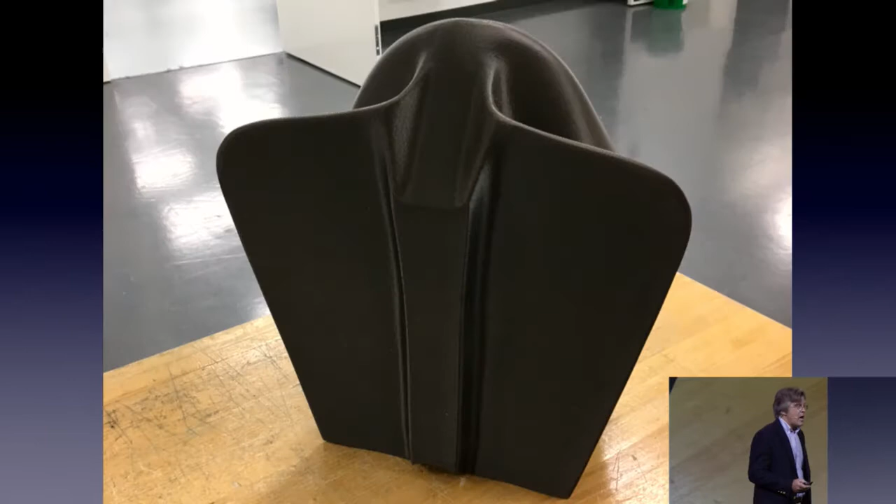So it's that front nose cone that you see on the double sled. It has to fit all those body parts coming through it. One leg a little bigger, one leg a little smaller. It has to be comfortable. And so we're using their material, the sacrificial material. We print it. Only takes a couple of days. And you can see it's a very complex part.

But then we just wrap it with glass. We do your basic composite layup on it. And then we have a part. We throw it back. They wash out the sacrificial material. We have the hollow part we need. We even had them make a trim mold for it so that we could cut it, and voila. Prototype to finished product within a matter of weeks.

And in our sport, weeks matter. We're in the wind tunnel in June, and our sleds have to be on ice in September. So we have to turn the designs within a matter of weeks. This one was done in less than 6 weeks, and I was on vacation for half of it. That's how easy it went.

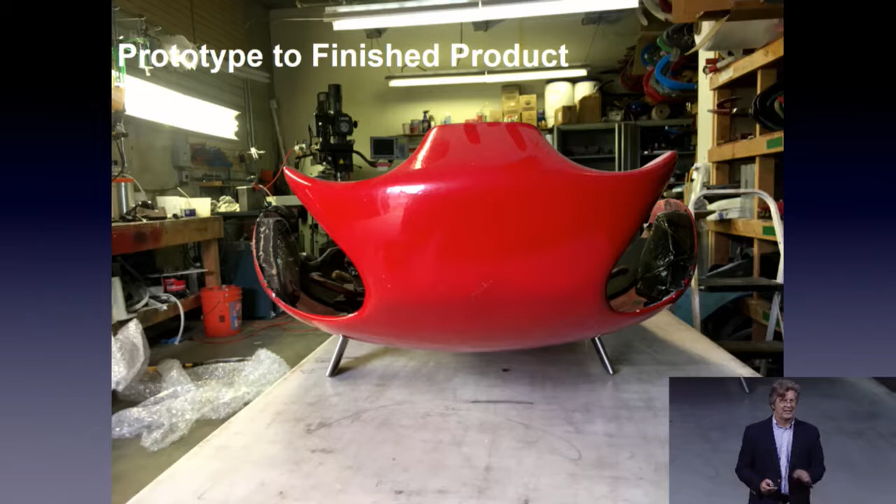There's another part on the sled, and again, I'm picking on doubles because that's what we mostly have worked on in the last little bit, and it's also incredibly complex. What you have here is the runner, that's called a Kufen. It's a German sport. We still use a lot of the German terms in the sport. So if you can say Gesundheit, now you have Kufen, you now have 2 German words in your vocabulary. We're getting smarter every day.

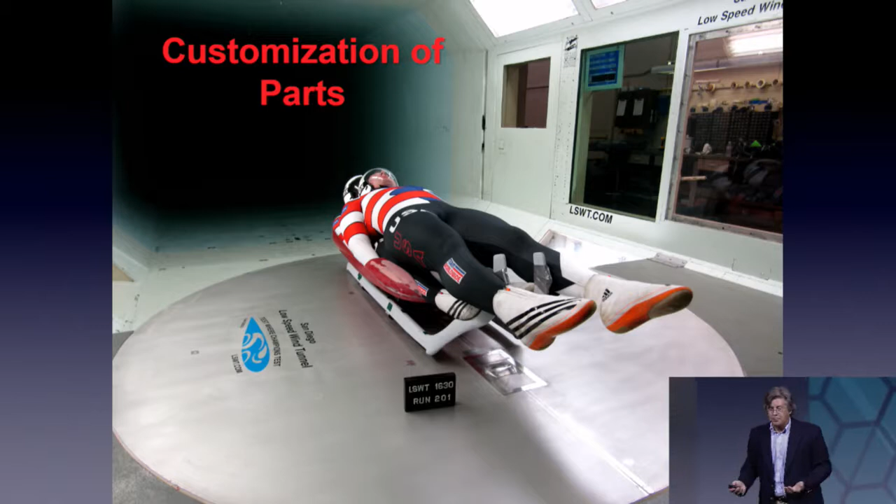So the Kufen, as you come up through the front horn where the legs are, those have to fit. They functionally have to drive, and they functionally have to be comfortable on the sled. So how do we do that? Again, we prototype it, we print it, do a composite wrap for each team. If the team says, no, I think I need a little bit wider, okay, we throw it back into the CAD design, and we start moving it around a little bit. You need a little wider, we can see the changes, we can track the changes in all the parts, and that's how we do it.

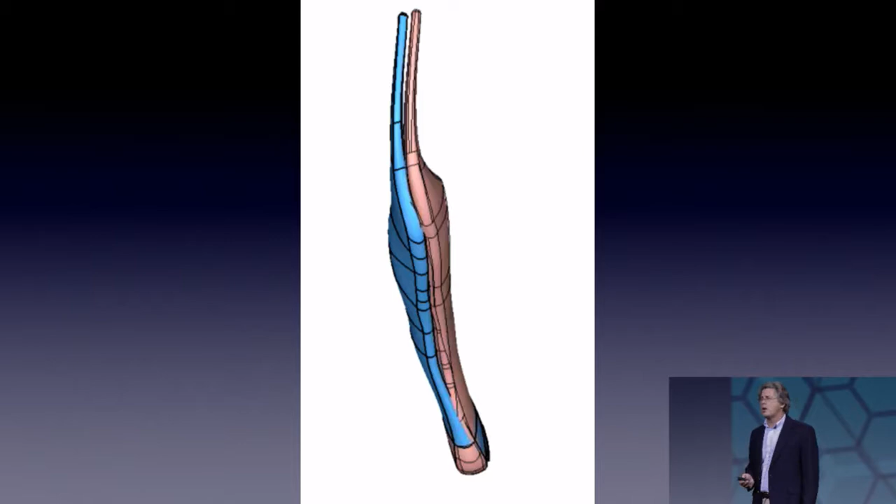And then we can take those designs and throw them into your basic FEA type of engineering program. We can do all the strength tests, we can do the flex tests, we can test the bonds between the body parts, we can do all of that because the materials that we're printing from now are well known enough that we can just put them right into the FEA programs, and we end up with the part.

So if you can figure that you're going down a track at 80 miles an hour, pulling 5Gs, you might get the idea that you could bounce around a little bit and end up in the wrong place on the sled. So that's a piece that actually holds you where you're supposed to be, because it's good to be where you're supposed to be. It also holds a whole lot of technology. So there's a lot of technology under there, and it's a sport where you don't have that much to work with. There's like 6 or 7 basic parts in the sled.

So you have to maximize the technology that you're putting into each one of those parts. So there's a lot of tech that's being hidden under there as well. But it's the Olympics. So why are we just sitting there making a boring part? We had to spangle it up a little bit. It's the Olympics. Go USA. Go team. So we used a PolyJet and we printed up a little spangling on it to make it look a little more sexy for the games. And these were on every single one of the sleds in the games. So we had a lot of parts.

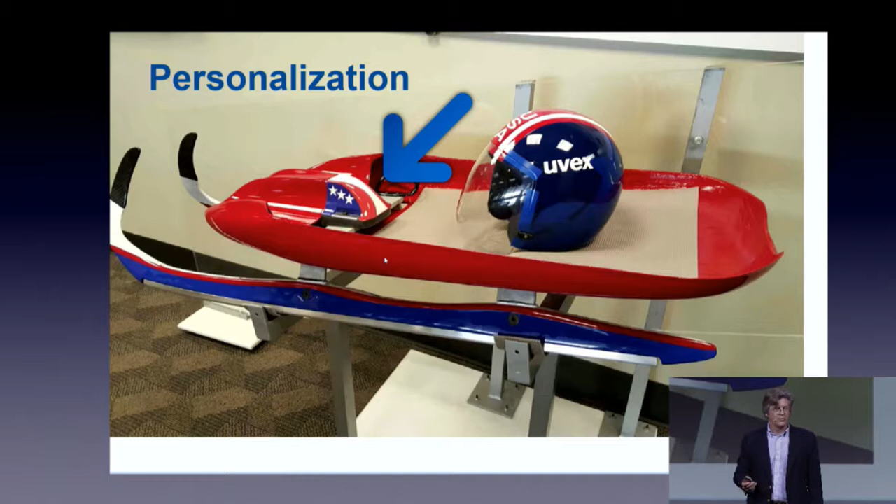But at the end of the day, parts are still just parts. A basic STL file, pick your material, throw it off, print it up, and that's what you've got, is a basic sled. And so in our world, in luge, it's changing rapidly. We've got lots of new ideas, new technologies coming. We won a few medals in the Olympics back in the late 90s, early 2000s in doubles, and we won a women's medal in Sochi, and we just won a men's medal. If you look at the World Cup rankings and the Olympics, we have come from down in the middle of the pack. So we are one of the powers in the world.

This doubles technology that I just talked about today took us from an average of 12th place in the Olympics to an average of 6th place. So we've cut our margin in half, and going into the next games with the next ideas, I believe we are going to be right on the podium with the doubles program, just like we have been with the singles in men and women, and I believe that this technology is definitely what's helping us out. So in the end, we're printing parts, and we're going to the Olympics with them, so keep your eyes out. It's really changing a lot of sports for us. Thank you very much.

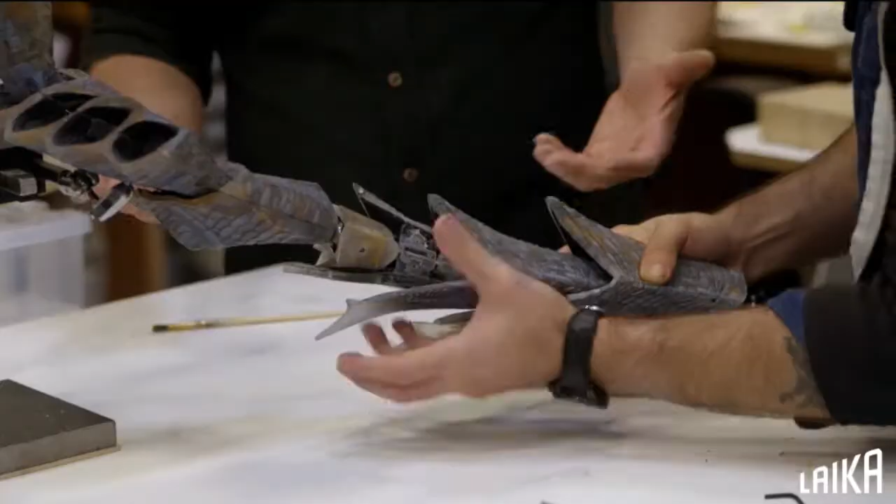To do it practically in camera is something we try to do as much as possible. But at the same time, we bring cutting-edge technology into the process. Whether it's science or innovation, it's worth a risk sometimes to go out on a limb. And with each successive film, we all work and grow as artists.

We really wanted to find a way to push facial animation beyond what we'd ever done before, with subtlety and a range of emotion. You get totally transported into the story and forget you're watching a little 12-inch puppet. It's hands-on, it's tactile, there's a life to it that most other animation forms don't have anymore.

We're a group of really talented artists who want to do it the best that we can. Here at LAIKA, the energy, the atmosphere just really crackles with that creativity. We don't have to be limited in the stories that we tell. That's what's exciting about the studio.

It feels like we really are just scratching the surface of what this art form can do. And that's incredibly exciting to me.

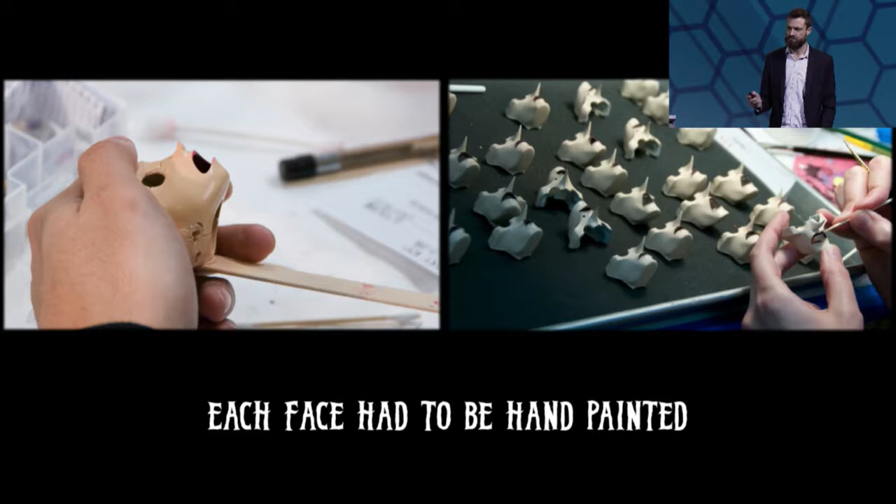So after Coraline, for our next film, The Boxtrolls, we wanted to try something different. We knew we had tapped into something with the 3D printers, and we wanted to see if there was a way that we could infuse color into the 3D printed parts.

You guys are all probably familiar with this. This is a 3D Systems Z650, and this is what we actually used to produce the faces. The faces were printed out of this powder material, and then we would go through a process of needing to fuse them with super glue.

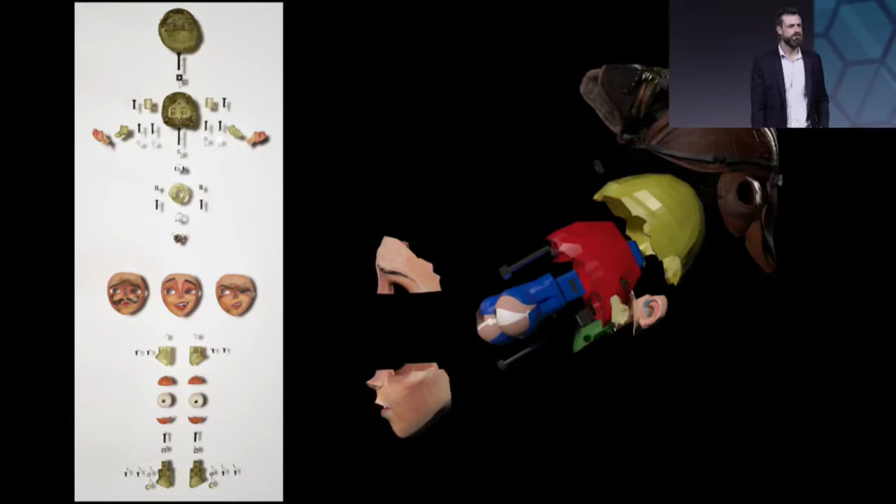So the problem with the super glue process was that it was really easy to screw up a part. You could easily rub off a nose or break a lip. So we were using it for the faces, and we were still using the PolyJet technology for all the internal components.

So what you see here is a character, Eggs, from the movie The Boxtrolls, and he had about 60 pieces that were designed and engineered custom for his face or head, and they were all 3D printed out of PolyJet technology.

Because of our techniques and what we had pioneered, we were actually awarded a scientific and technical Oscar, also known as the Nerd Oscars. This isn't a normal Oscar with stars and a glamorous red carpet, and it's not tied to an actual movie—it's tied to a process. It took many years for the Academy to investigate our process, and they wrote a 100-page book on it that lives somewhere in the Academy vault. They decided to award us this, since you have to prove your technique is changing the industry for the better and having a lasting impact. That was a huge honor for us.

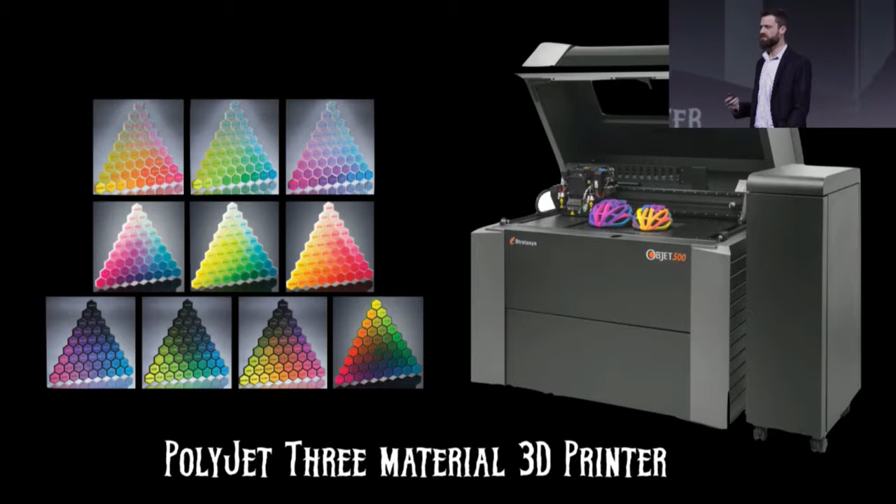So I was at a crossroads. I either needed to go back to the director and say we'd have to change the way the characters look, or we had to find some new way to achieve the director's vision.

At the time, the Connex 3 had just come into beta. It was this 3-material printer—you had the ability to produce 3 different colors, put them in the machine, and produce about 45 uniquely blended colors. But you were limited to 3 colors, and limited in how you could assign those colors through shell assignment. We knew that if we were going to make this work, we had to find a way to work with Stratasys and be very creative to come up with a solution.

Stratasys essentially allowed us to bypass the printer, bypass the software, and slice our own files. So we were doing voxel printing back in 2014—that's what I'll talk a lot about later today. Essentially what we were doing was taking these discrete colors, expanding the palettes through lookup tables, and then doing texture map painting.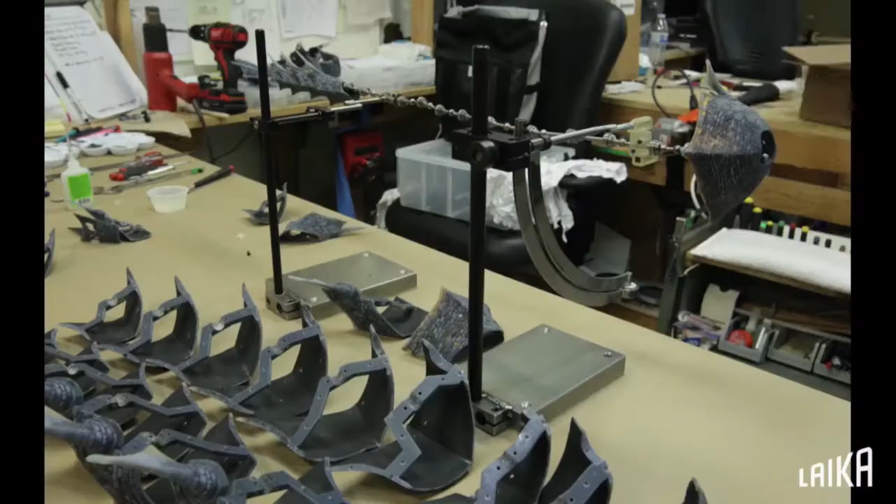The climax of the film centers around an epic battle between Kubo and the dreaded Moonbeast. The rapid prototyping team had written their own 3D printer software, allowing them for the first time to print highly complex colored plastics. By developing this 3D printing software, the filmmakers could control material and color placement on the voxel level. Over 150 body parts were designed, sculpted, and texture painted in the computer and then 3D color printed out of plastic. Each 3D printed body segment was then backed with gold mylar and assembled around a gooseneck armature, allowing for smooth, sweeping animation and subtle control. The puppet was built at 1/5 scale and animated with multiple camera setups and an elaborate rigging system. The camera team had to create a separate workflow for shooting this character to hold focus and achieve a deep depth of field. They accomplished this by cropping a usable 3K image out of the 5K RAW file, as opposed to resizing the full chip image to the working size of 2K.

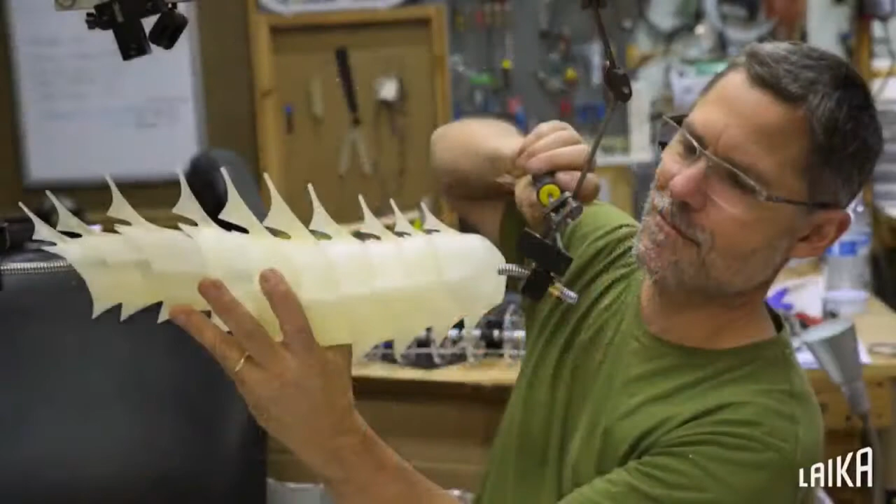In order to realize the desired look and work around the 3D printer's limited color gamut, the RP, camera, and VFX departments worked together to come up with the right formula of color 3D printed materials, lighting, and a digital post-process. The puppet was shot on green screen and photographed under 3 different lighting scenarios. 2 white light passes were layered and combined before passing through a multi-step color process. An ultraviolet pass brought out the edge lines on his body, adding a radiating cyan glow. Using Oscar award-winning RP facial animation technology, over 1,417 Moonbeast mouths were printed, taking more than 147 days of round-the-clock printing.

Then I'll just have to rip it out of your head again.

After the movie Kubo came out, we were really excited by how well it did critically. It was one of the highest ranked movies on Rotten Tomatoes. It went on to be nominated for Best Animated Feature, but what was really amazing is it also went on to be nominated for Best Visual Effects. This is the first time a film had ever been nominated in both the animated category and the visual effects category, and that had a lot to do with the techniques we helped pioneer using 3D printers.

So what's next? What is LAIKA working on now? Well, we're on our 5th film. We've actually just wrapped it. It's in post-production, and we're using the J750, which is this multi-material machine from Stratasys.

We started working with this in 2015, in early beta, and then in 2016 we got the first 5 off the assembly line. Now, I don't have a lot of imagery to show about the technology because all of the imagery for the film is still under wraps. But over there on the table is probably one of the scariest things you guys will ever see: a human head that was printed using the J750 with this software combination I'm talking about. We also have some puppets over there after the show, and I'll be over there answering questions.

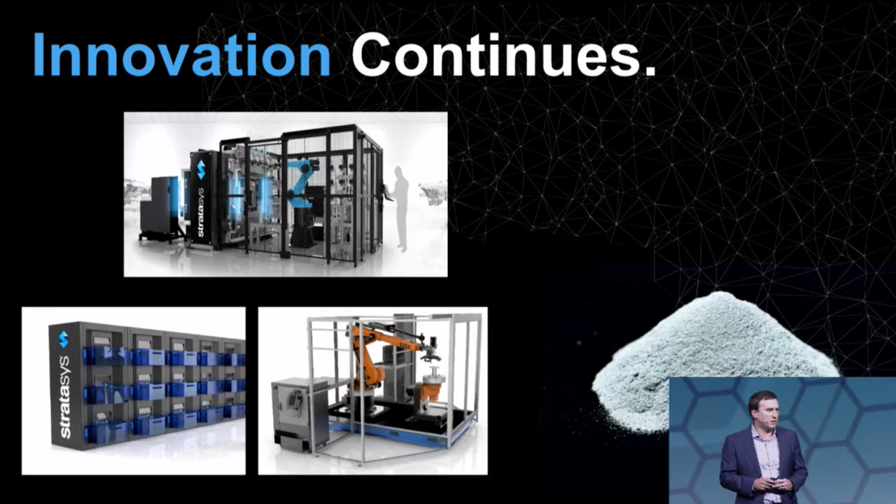Thanks, Rich. I should say thanks, boss, I guess, but hey, thanks for hanging around for us to wrap this up today. I'm going to split this presentation into two parts, and in the middle we're going to have one of those polling questions to keep you guys on your feet and awake. The first part I really want to focus on is business innovation.

We've heard from the guys at LAIKA and from the guys at USA Luge about how they're using 3D printing as a technology to drive forward their tangible products and innovation in the physical things they make. They're doing that using Stratasys technologies faster, with better color, better realism. But there's more to business than just product.

The thing that really excites and interests me about 3D printing and the work I do in our consulting group at Stratasys is actually more about the method and the idea. What goes behind a company adopting this technology? Why do we use it? We don't just use it to innovate new products.

There's some great work done around 2010 by a company called Doblin, now part of Monitor Deloitte. Doblin did a kind of innovation canvas across business, and they identified that product development and tangible products are just one part of the business landscape. There's actually a whole range of different parts of your business that you can innovate.

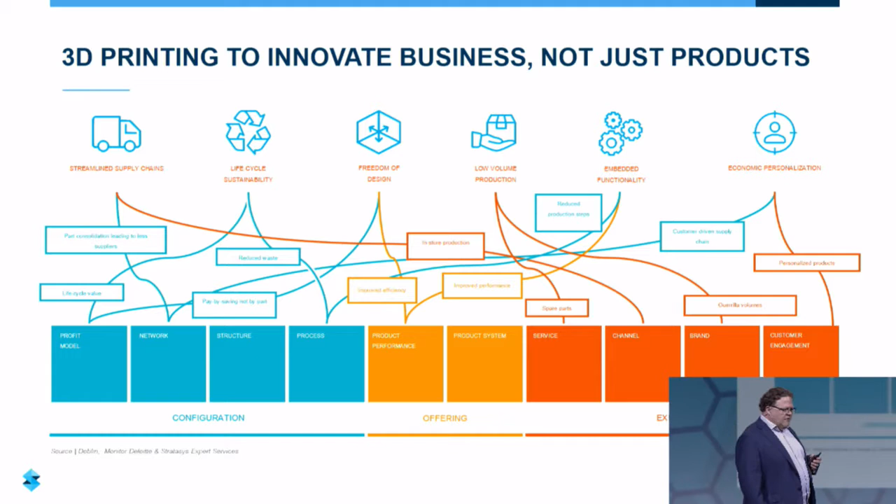It's kind of interesting when you map this against Doblin's framework for innovation, because you start to see all these different business reasons why we should be embedding 3D printing into our organization.

So that earlier polling question showing one of the biggest barriers was cost and getting your management on board—well, actually, maybe the way to get your management on board and understand the true cost of 3D printing isn't to think just about product development. It's to think about the business benefits, the ways you can change your profit pools, the way you can change your organizational structure. That's how you get management excited about 3D printing.

We've done a lot of mapping over the last 5 or 6 years about where these innovation steps come from. There's a lot of different benefits we can have across the supply chain, benefits around efficiencies. If you look at a lot of the great case studies of where 3D printing is being used today, it's being used to drive those efficiencies in supply chains.

The much heralded GE jet engine components - why are we doing it? We're doing it because GE makes more efficient jet engines, reduces fuel consumption. The business benefit is actually in the application of the 3D printed part. So lots and lots of business benefits from 3D printing.

I just want to have one final polling question before we talk about some new product innovation within Stratasys. So if we could go up to the poll, wherever it will appear. Maybe there is no poll. Here we go. So our poll, we're really interested to understand where you guys truly think you are. I know there's a lot of new people to RAPID here - are you new to the 3D printing industry?

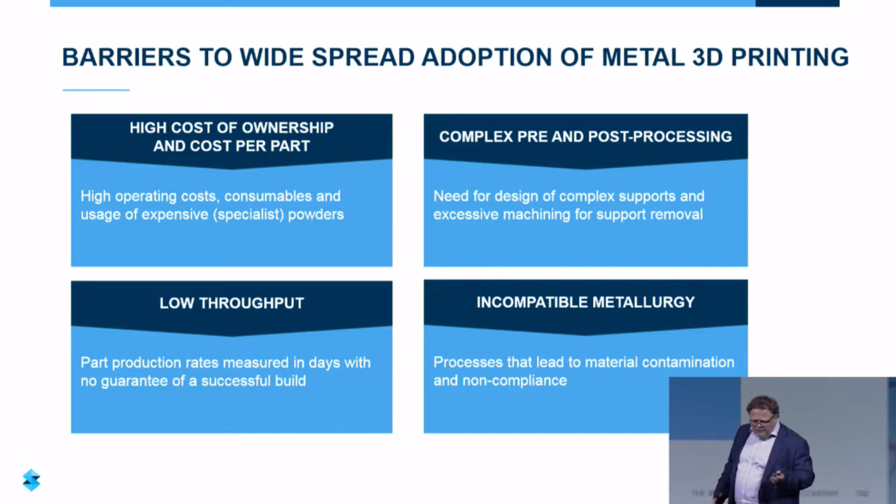So within that landscape, we've been innovating over in our labs in Israel. And our starting point, and what we're launching here and what's on display next door, is aluminium, or aluminum. It's a real challenge, aluminum.

But if you look at aluminum as a material, it's actually a big marketplace - 75 million tons of aluminum parts a year, within the transport sectors, consumer goods, machinery, industry sectors that we know and that our customers are already working within.

So what we've developed is a technology that uses some of the proprietary knowledge that Stratasys has around jetting. It's been built from the ground up, so it's never been built as a prototyping solution. It's a production aluminum part manufacturing platform.

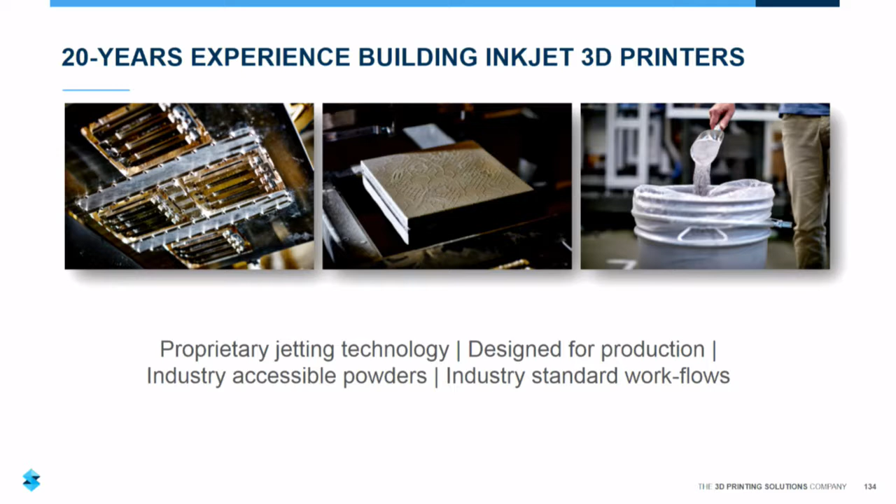Another change of direction is the materials that it uses are industry standard materials, using industry standard economics. This isn't gas atomized, spherically graded metal powder. This is industry standard metal powder used in powder injection molding, metal injection molding around the world.

What we've also tried to do is develop something that's an industry standard workflow, something that integrates into existing businesses, into existing supply chains, into existing factories. So that's what we're getting today, high quality aluminum parts. Parts that are really aimed at the automotive, the defense, the aerospace, industrial machinery, white goods manufacture.

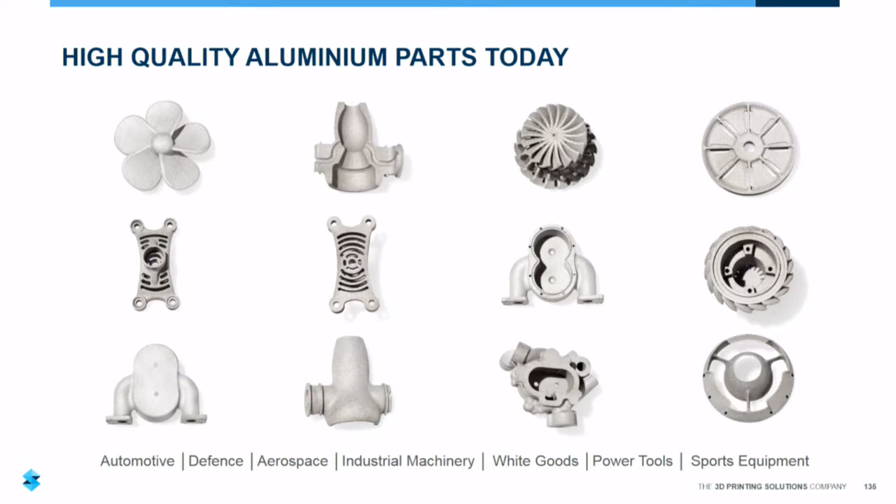So think parts that typically you would either make through powder injection molding, metal injection molding, die casting, investment casting, in unit volumes of 10s, 20s, 50s, 100s, 200s. That's where the technology fits. That's the sweet spot.

Some other key things here, a bit techy, I'm afraid, but it's worth pointing this out to you. The architecture of the technology that we're announcing today, what you put in is what you get out. The chemical composition of the metals that come out of this process are exactly the same as those that go in. There is no percentage of other organic carbon-based material in there.

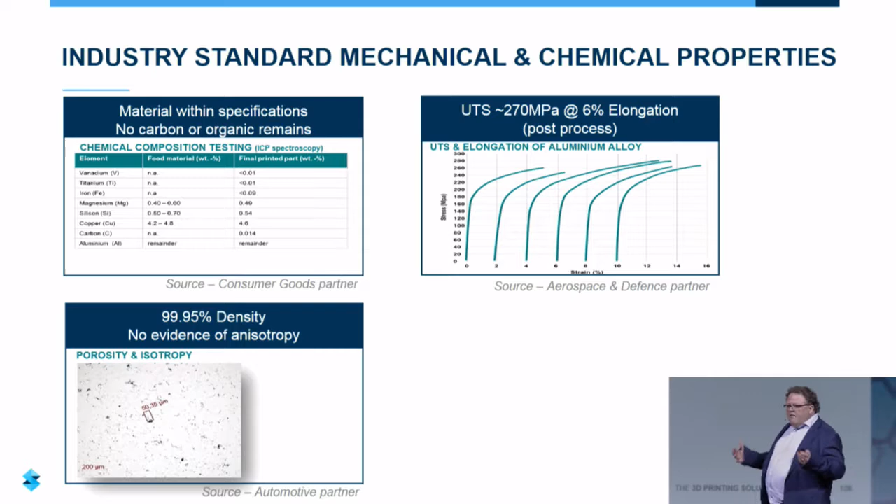99.95% density of material. No evidence of anisotropy in that Z-axis. And industry standard mechanical properties, so 270 MPa as an aluminum material. So very common industry standard figures that you would expect from a powder-based aluminum process.

So just to wrap up, cost reduction: our care here and our consideration is not necessarily cost of hardware, but the cost of the components that come off that hardware. And what we found with this technology and the way that we've architectured it for productivity, we get an 80% reduction in aluminum part cost compared to today's laser-based additive technologies. Largely, we achieve that through using a standard traditional metal powder route.

The other thing we get is operational simplicity. We've architectured a technology that doesn't think about traditional support structures that you'd see with metals technologies. So we talk about post-processing going from hours down to minutes with this technology. And throughput 9 times faster than lasers on aluminium.

And again, I have to stress this, industry standard workflows. We don't want to reinvent the manufacturing process. We want to integrate 3D technologies into existing factories. And a key teaser to leave you with, high density green state parts. That's a real important differentiator here.

So with that, I want to finish up and wrap up for Stratasys. I hope the keynote has been of interest and stimulated you with some fantastic work that our customers like LAIKA and US Luge are doing. With that, I'm going to hand over back to Debbie from the SME to wrap things up. Thank you.